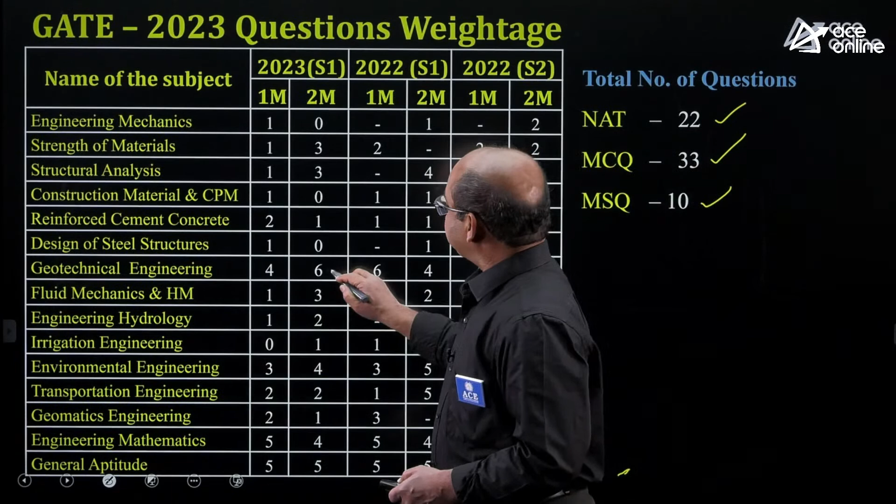Let me discuss the weightage given in the latest GATE 2023 forenoon session civil engineering paper. I am displaying the weightage given for 2023 along with the previous 2022 GATE exam. Like every year, without any surprise, geotechnical engineering enjoys the highest weightage. 6 two-mark questions and 4 one-mark questions come to about 16 marks, the highest weightage given for GT subject. It's not surprising - every year this is more or less the same pattern, 14 to 16 questions coming up.

Next followed by environmental engineering - 4 two-mark questions and 3 one-mark questions, that comes to about 11 marks in total. Then as usual, transportation engineering has 2 two-mark questions and some one-mark questions, around 6 marks total. Mathematics aptitude has no change at all, that is a regular weightage as usual in the GATE papers of civil engineering. The other subjects' weightage you can see here.

This is normally the pattern you see every year in the GATE exam of civil engineering paper, but there is not much deviation. If you have prepared for this GATE examination as per the weightage given for previous years, you can definitely excel this year also, as the pattern of questions and the branch-wise, subject-wise distribution are concerned. Now I will discuss some questions gathered through our students' memory base, the questions of geotechnical engineering. Then my team members will follow one by one.

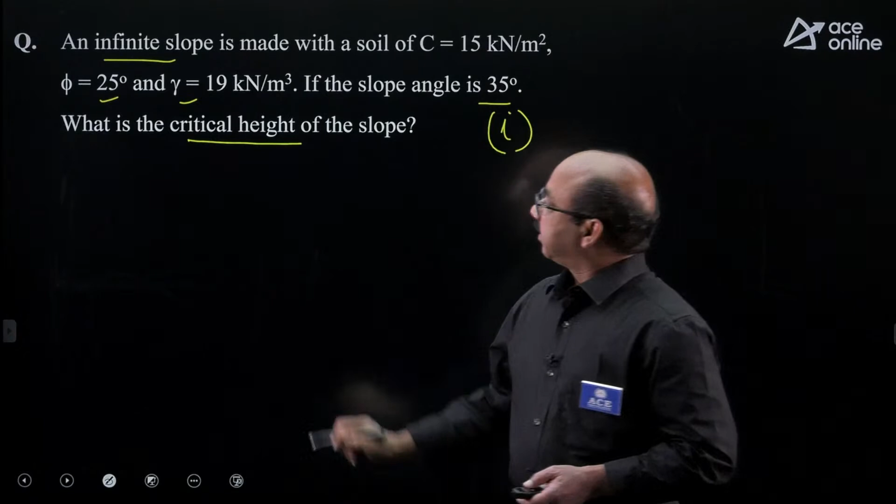What we have gathered: an infinite slope is made with a soil of C value 15 kilopascals, phi is given, gamma also given, and the slope angle also given. What is the critical height of the slope? Please mind it, it is an infinite slope, that is the main point you have to be careful about - it's not a finite slope. Phi is given, gamma is given, and the slope angle we will abbreviate as I. So you are asked to find the critical height of this slope. Critical height of the slope means it is the slope where the factor of safety is going to be 1, unity value.

You may recall the factor of safety equation for infinite slopes. With the usual notations, I read directly the expression: FS = [C + gamma z cos squared I tan phi] upon [gamma z cos I sin I]. For critical height, the factor of safety is taken as 1, and the depth of slope, the z value, we will abbreviate as HC - that is the usual notation we follow. So accordingly, when you write the expression with factor of safety taken as 1: C + gamma into HC cos squared I tan phi, by gamma into HC cos I sin I.

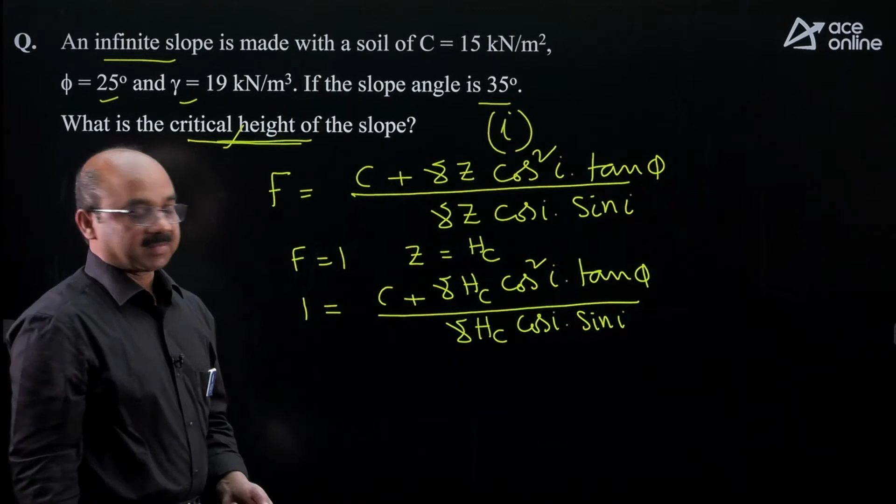In the given problem, the question asks for critical height, you are asked to find HC. So from this expression, you have to take HC common, and if you write the final expression, it is going to be like this.

The final expression is going to be like this: HC is equal to C by gamma, cos squared I, into tan I minus tan phi.

You can see here the C value is given as 15 kilopascals. This is available, gamma also available, I value, this is the I value, and phi angle of internal friction, that is also given as 25 degrees. If you substitute all these values in the expression, finally the answer is going to be like this.

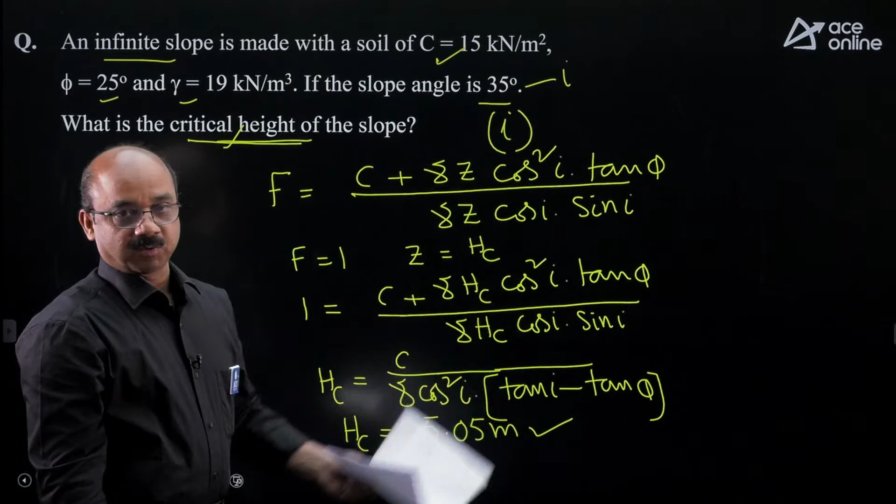The HC value is going to be, when you work out, it comes to be 5.05 meters. So this is the answer for this question. Let us go to the next question.

Yeah, look at this question. This is the MSQ type. You are given some statements with respect to the compaction curve of soils. Based on that, you are given some statements A, B, C, D. You are asked to verify the correct statements here. That question is not properly typed here. The question is you have to verify which are the correct options regarding this compaction curve.

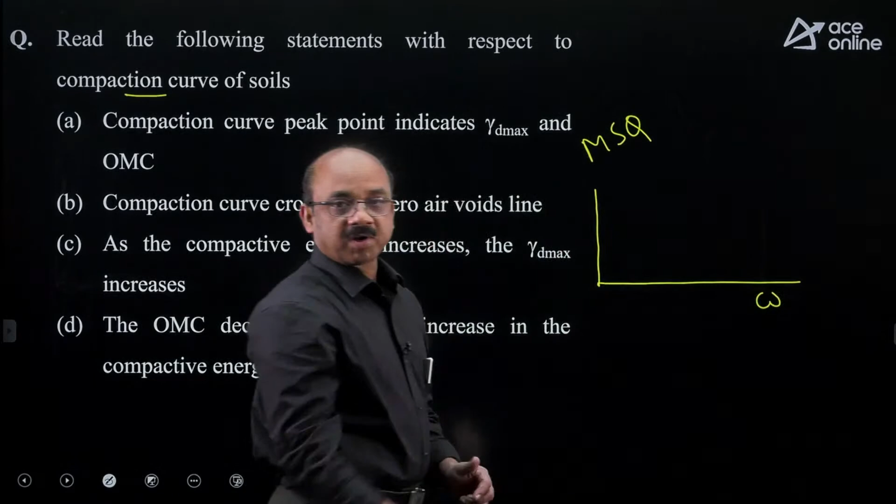So to answer this question, you have to recall the typical compaction curves when you conduct tests on soils, the shape particularly. So this is the compaction curve. Along x-axis, we draw the water content. Along the y-axis, the gamma D value. So this is one compaction curve, and this is another compaction curve. You must be knowing this is for the light compaction, and this is for the heavy compaction energies. And if you draw the zero air voids line, this is the zero air voids line.

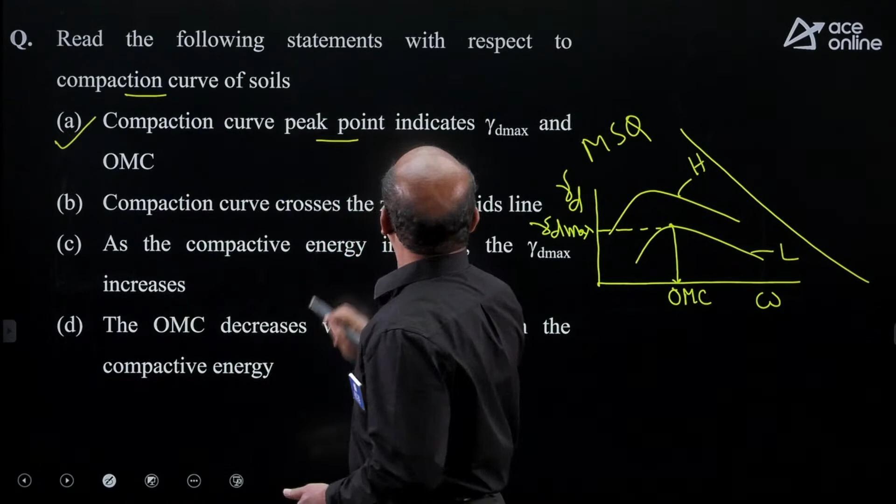Now let us examine the statements one by one. What does the first statement say? Compaction curve peak point indicates gamma D max and OMC. This is absolutely correct statement. Why? Because if you see any one of the compaction curves, this is the peak point. So this x coordinate will give you the OMC value, and the y coordinate will give you the gamma D maximum.

That is how we pick up the OMC and gamma D max from the compaction curve, so this is a correct statement. Next point: compaction curve crosses the zero air voids line. You can see here the compaction curves and the zero air void line. Compaction curve for actual soils will never cross the zero air voids line, because this is only theoretical, these are the actual curves. So therefore, what the statement says, crosses the zero voids, it is not correct. So this is a wrong statement.

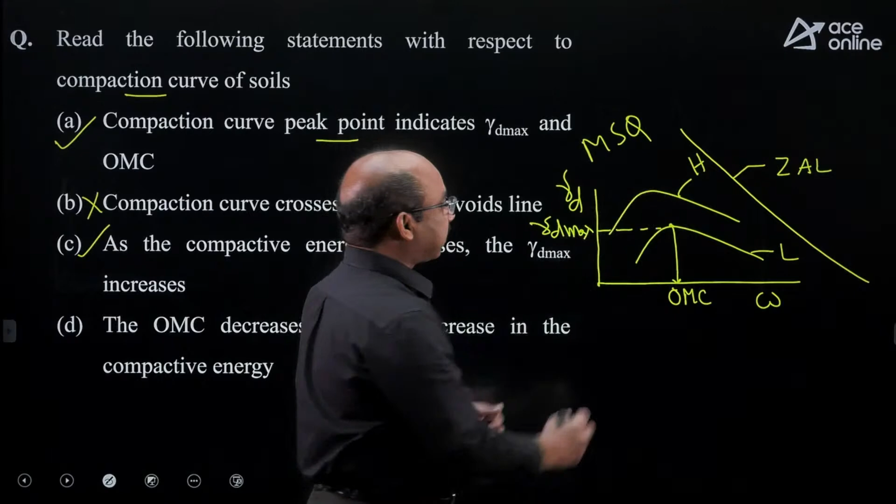Next one: as the compactive energy increases, the gamma D maximum increases. That is true. Compared to light compaction, you can see heavy compaction has got more gamma D value. So this is a correct statement. Next one: the OMC decreases with the increase in the compactive energy. Yes, that is true. You can see here, when energy is light, we have more OMC. When energy is heavy, the OMC value got decreased. So therefore, the OMC decreases with the increase in the energy. This is also a correct statement.

So from the memory-based options what you have got from the students, these are the statements prepared. From these statements shown here, these are the three correct statements. But in actual exam, there may be some variation also, so please verify accordingly.

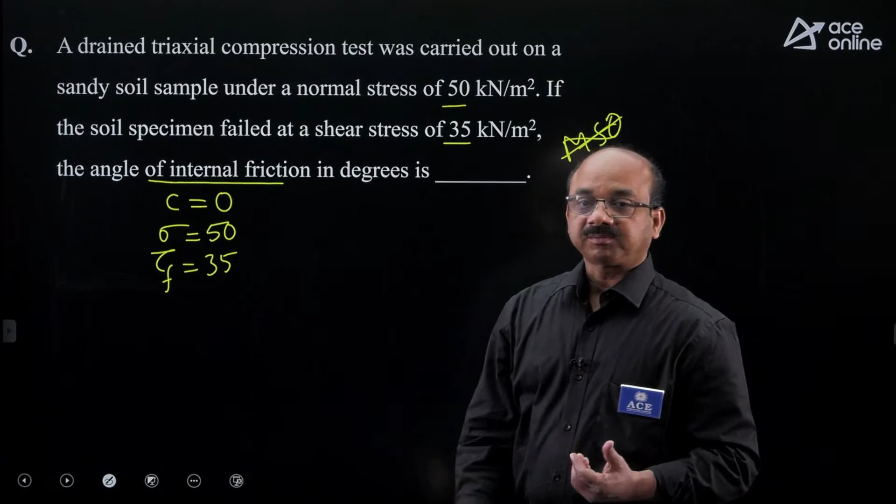Normal stress is given as 50 kilopascals. Sigma is 50 kilopascals. The soil specimen failed at a shear stress of 35, so failed shear stress is given as 35 kilopascals. The question is, what is the angle of internal friction of the soil in terms of degrees? The phi value is asked there. You know this Coulomb's equation: tau f is equal to C plus sigma into tan phi.

Because it's a drained test, I have to use C dash, sigma dash, phi dash, so the given data I have to take accordingly. C is 0 here. When I substitute the data, the failure shear stress tau f is given as 35 kilopascals. So 35 equals C value 0, the sigma value is 50, and tan phi dash. From this, tan phi dash equals 35 by 50.

If you use your calculator, when you work out tan inverse of 35 by 50, it comes to be 35 degrees. So friends, this is the answer, 35 degrees.

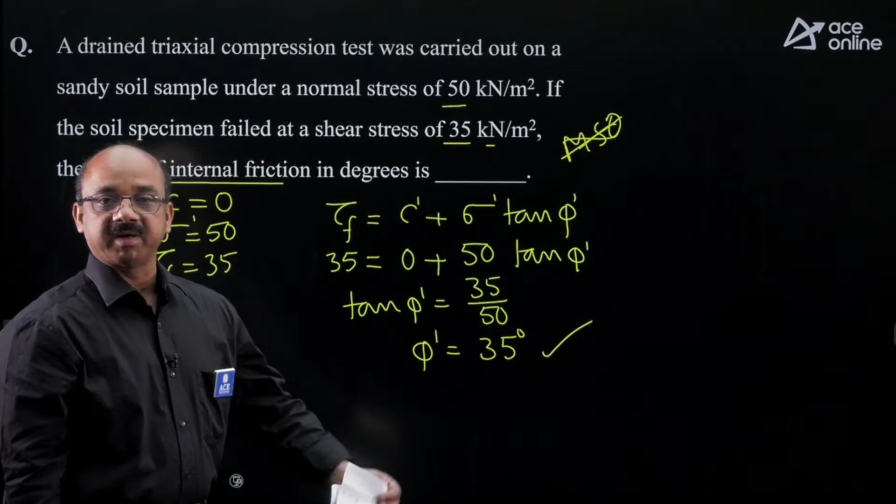Next we will see another question, from lateral earth pressure, that is nothing but retaining walls. Based on data gathered from the students, we have prepared this figure indicating the data given there - a multi-layered, non-homogeneous soil, with surcharge also. The question is, what is the active pressure in kilopascals at the base level of the wall? So obviously, we have to use the Rankine's formula.

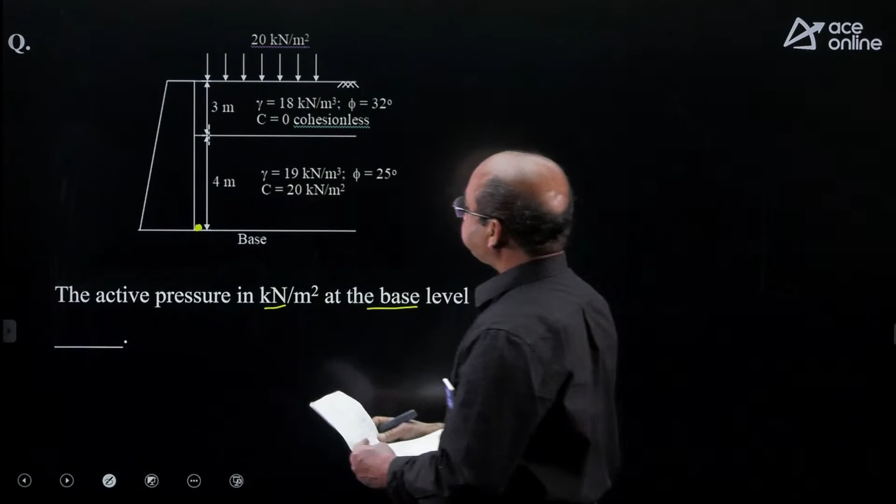If you recall the equation for how to find lateral pressure at any point, we have an equation like this: active pressure at any point equals coefficient of active pressure Ka, into sigma v minus 2c into square root of Ka. This is the general equation I have written there.

So the question is which Ka you are supposed to use there. There are two Ka values, Ka for soil 1 and Ka for soil 2. Because the point is at the bottom of the wall, you are supposed to use the Ka value corresponding to the soil present at the base. Let this K value be Ka2 and this be Ka1. So I write Ka2, sigma v, minus 2C2 root of Ka2. Here C1 is 0, and this is to be taken as C2. So these values you have to take there.

But first of all we require what is called sigma v, the vertical stress at the bottom of the wall. So let me find the vertical stress first. At base, the vertical stress is equal to - don't forget there is a surcharge here.

So Q plus 3 meters depth has a gamma value of 18, I call it gamma 1, and then another 4 meters has the gamma value I call gamma 2, which is 19. When you set the data accordingly, sigma v equals surcharge Q, plus 3 meters into gamma 18, plus 4 meters into gamma 2 value 19. It works out to be 150 kilopascals, that is the vertical stress.

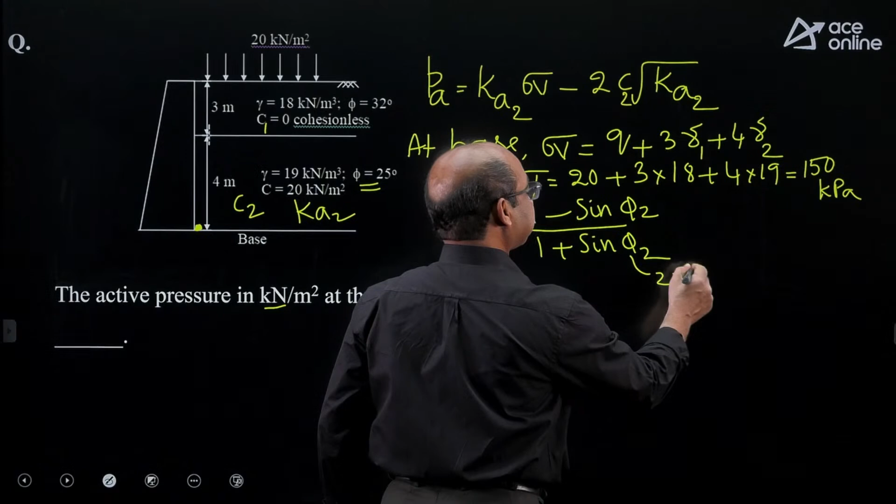Then what about Ka2 at the base of the wall? We have to use Rankine's equation for the coefficient of active pressure: it is equal to 1 minus sine phi2 upon 1 plus sine phi2. Here the phi2 value you are supposed to take is 25 degrees. So when you use the calculator, the Ka2 value works out to be 0.406.

Accordingly, when you substitute back in the equation, the Pa value will work out like this. Therefore Pa equals this equation I am going to use now. Substituting the values: Ka2 that is 0.406, sigma v 150, minus 2C2 - C2 value means soil number 2, the C2 value is 20 kilopascals - so minus 2C2, that is 20, square root of Ka2, 0.406.

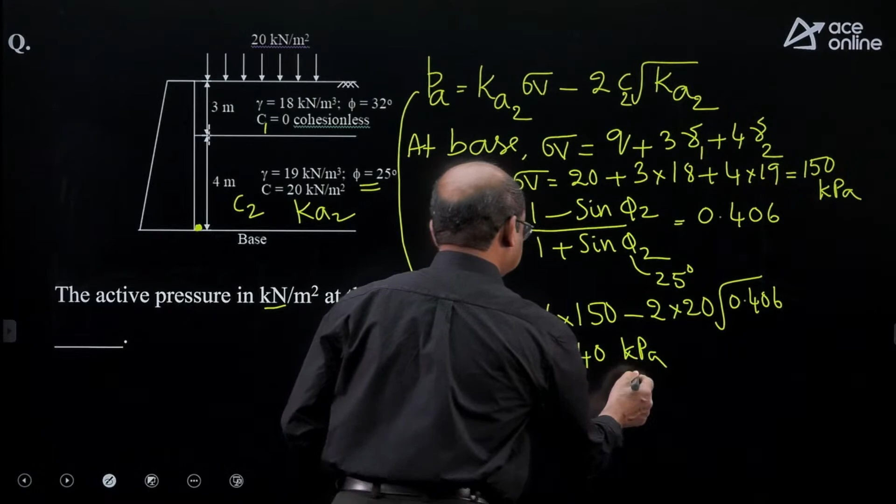So when you apply the calculation, the final value: Ka sigma v minus 2C root Ka comes to be 35.4 kilopascals nearly. So this is the nearest value, this is the answer for this question, 35.4 kilopascals.

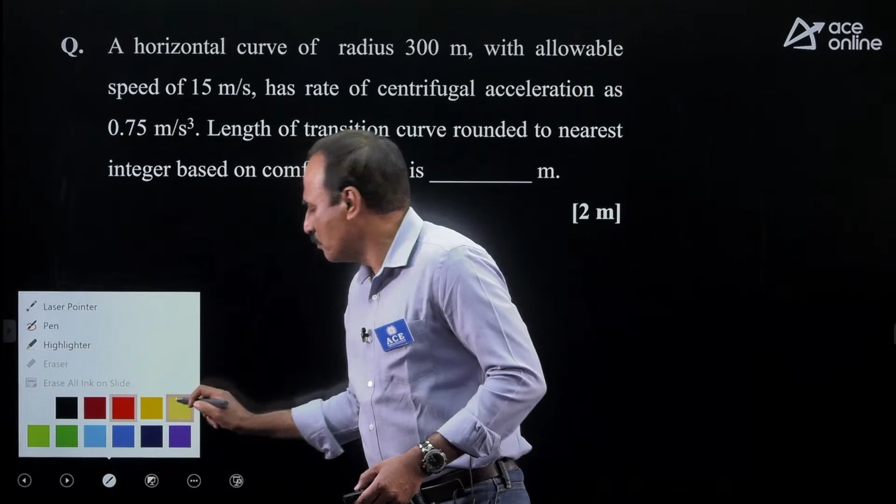You can see the data here is a very simple straightforward substitution type of question. The radius of the curve is given with allowable speed 15 meter per second, directly small v is given. The rate of centrifugal acceleration, capital C, is directly given to us as 0.75. The length of transition curve rounded to nearest integer based upon the comfort criteria or centrifugal criteria.

If you remember the formula, the length of transition based upon the comfort or centrifugal criteria is V cube upon C into R. V cube, so 15 into 15 into 15. Even without a calculator you can do it, but you need to use the online calculator to save time and increase accuracy. So 0.75 and radius is 300. If you simplify, it is directly 15 meter length.

They are asking you the length based upon comfort criteria directly. Simple formula, simple substitution, very simple answer. They are asking you to round it off to nearest integer. The answer itself is an integer, no need to round it off. Directly you can keep the answer as it is.

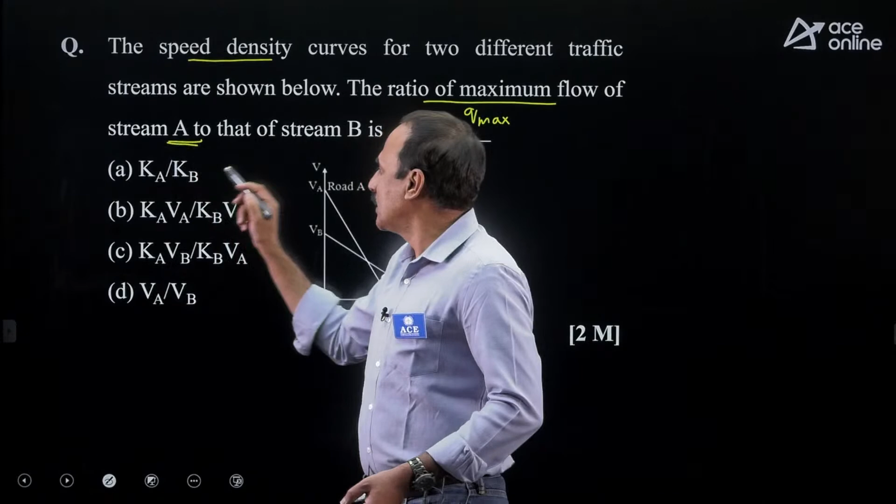Now come to this question. This is based upon traffic engineering, the linear speed density Greenshields model. The speed density curves for two different traffic streams are shown in the figure, speed on y-axis, density on x-axis. The ratio of maximum flow is nothing but capacity. They are asking you the ratio of the capacity of traffic stream A to that of traffic stream B. In a linear speed density model, Qmax is equal to Kmax by 2 into Vmax by 2.

So Qmax is directly proportional to K, directly proportional to V. And they are asking you here the Qmax of stream A to that of stream B. So it is directly related to Kmax of A and Vmax of A, divided by Kmax of stream B, Kb, and Vmax of stream B, Vb. So the answer here is

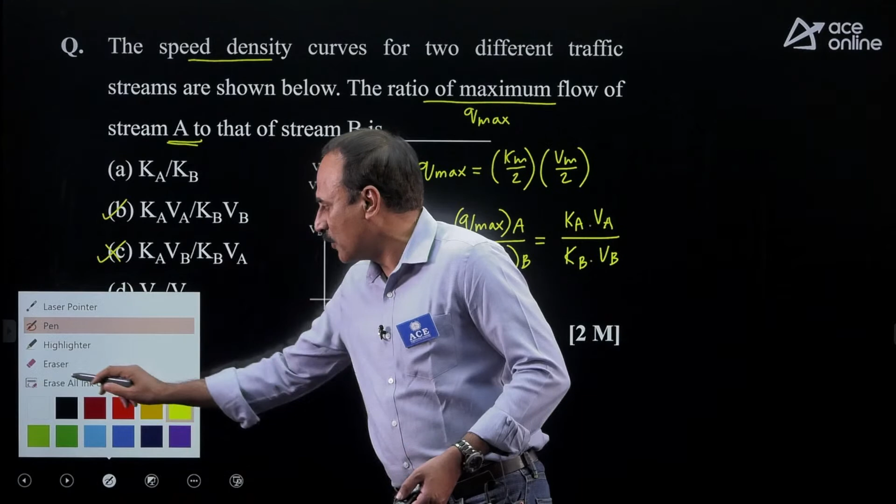Now coming to the other question, it is from the geometric design of vertical curves. You see magnitude of G1 and G2 are given, the gradient G1 less than G2 - this is the condition given to us. The gradient of G1 is less than G2, the magnitude values are given, and G1 and G2 are non-zero values, more than zero. Which of the following statements are true, they are asking.

So we take up the first statement: plus G1 plus G2. G1 is positive, an upward gradient, G2 also upward gradient, makes a summit curve. Let us check: G1 is upward going slope, and G1 is less than G2, G2 is higher. If you join with a curve from G1 to G2, is it a summit curve? No, it is not a summit curve, it is a valley curve - a concave type sag curve. So option 1 is false.

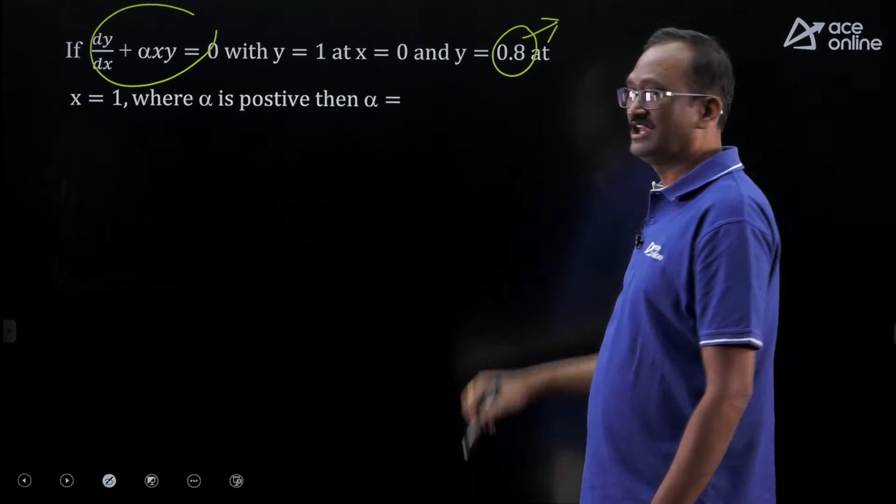Look at the question: dy by dx plus alpha xy equal to 0, with y equal to 1 at x equal to 0, and y equal to 8 at another point, not 0.8. So what is the given differential equation? dy by dx equal to alpha xy will go to that side, then it becomes minus alpha xy. All y terms on one side and x terms on the other side - it is simply a variable separable method. Y will go this side, so it is ln y minus alpha x dx.

If you integrate both sides, integration of 1 by y dy gives ln y equal to minus alpha x square by 2 plus c. What is the first condition? We were given y value 1, x value 0. If I take y equal to 1, ln 1 is 0. If I take x equal to 0, c is 0. Therefore, from equation number 1, c value is 0.

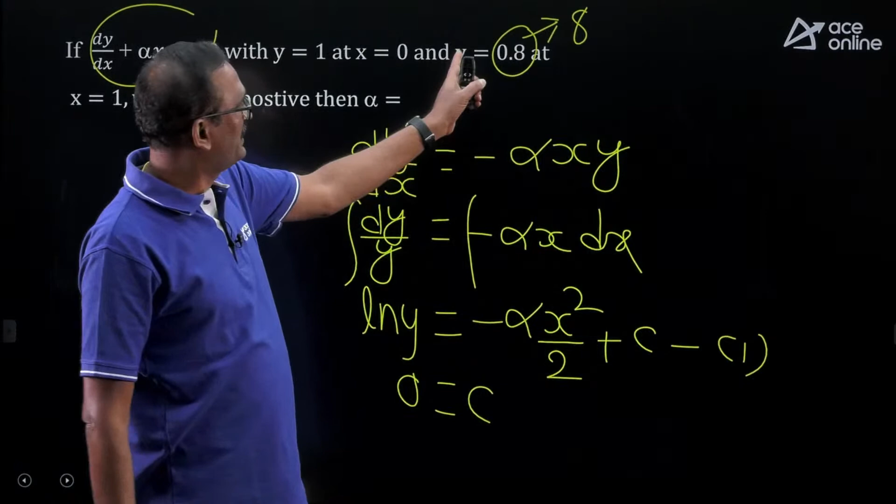So equation number 1 implies ln y equal to minus alpha x square by 2. What is the other condition we were given? y value 8 at x equal to 1. Therefore ln 8 equal to minus alpha by 2, not minus alpha square - this is minus alpha x square by 2, so here it is minus alpha by 2. So from this, what is alpha? Alpha equal to minus 2 ln 8. So I think approximately the answer is minus 4.15 or 4.16, roughly. This is the answer.

Just read out the question: the probability of occurrence of two independent events A and B are 0.5 and 0.8 respectively. Then the probability of occurrence of at least one of the events out of A or B is - regarding independent events, probability of occurrence of at least one...

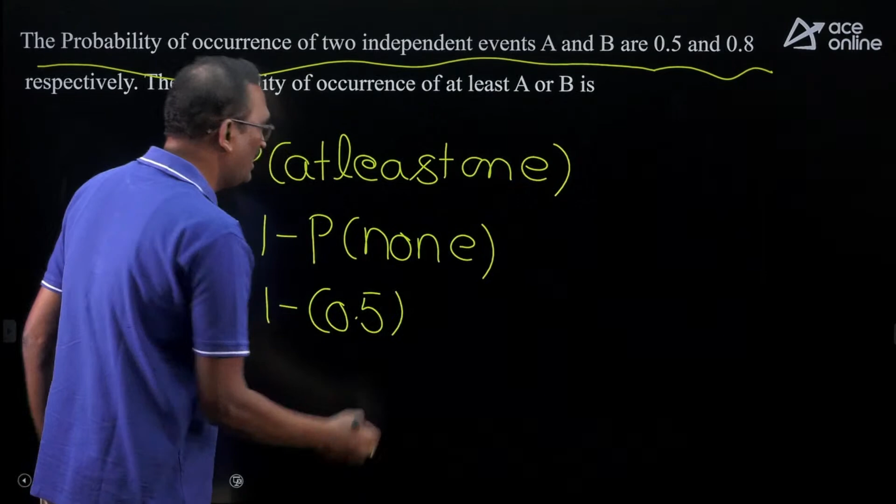...should be 1 minus probability of non-occurrence of both - no one can occur. At least one is 1 minus probability of none, meaning first event doesn't occur and second event doesn't occur. This equals 1 minus probability of first event occurs 0.5, doesn't occur is 0.5, and second event occurs is 0.8, doesn't occur is 0.2. So therefore this is 1 minus 0.1, answer 0.9.

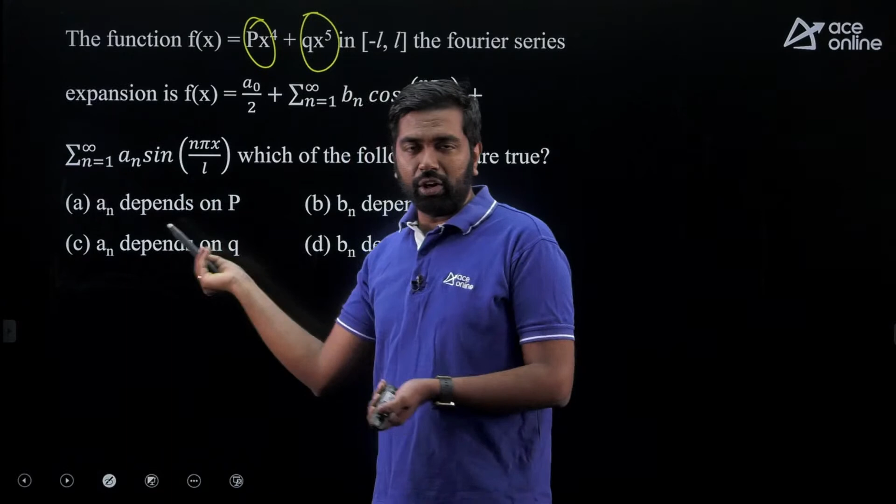We can write integral minus 1 to 1 of 1 by x square dx as 2 times integral 0 to 1 of 1 by x square dx. Don't try to directly integrate because it's an improper integral, so now simplify it using the help of a limit. This can be written as twice the limit as p tends to 0 plus of integral p to 1 of 1 by x square dx. Simplify this and based on that you can easily answer.

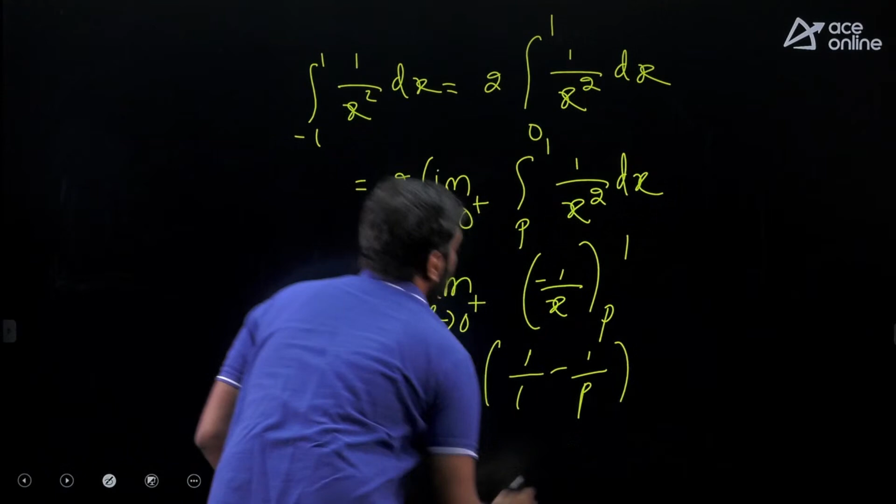So it is 2 times the limit as p tends to 0 plus of the integration of 1 by x square, which is minus 1 by x, with limits p to 1. Substitute the limits and then substitute p tends to 0 plus to conclude the answer. Pull the minus out: it becomes 1 minus 1 by p, and if you substitute p tends to 0 plus, it's like 1 by 0, which is infinity, with a minus here. Overall the answer would be like infinity.

There is also a 2 multiplying it, but 2 into infinity is still infinity. That means the integral does not converge. Do we have such an option? Yes, 'does not converge.' So that's it from the engineering mathematics section.

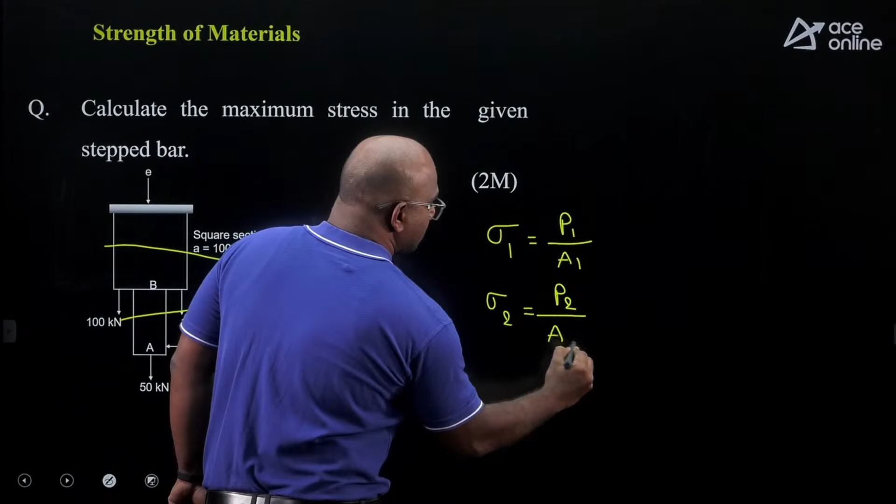For the first bar, look at only one direction to find the force. The force will be 50 divided by area. The cross section is square, 50 into 50, and the force given is 50 kilonewtons. So the answer comes out to 20 megapascals.

For the second force P2, add all the forces: 50 plus 100 plus 100 equals 250 kilonewtons, divided by the area. The area here is 100 by 100, giving 25 megapascals. Since it's asking for maximum stress, the answer is 25 megapascals.

Now coming to the next question, which is a pretty tricky one. He has given the state of stress at a point, but not on two mutually perpendicular planes — instead on two inclined planes. The question asks for the maximum normal stress, which indirectly means finding the principal stress.

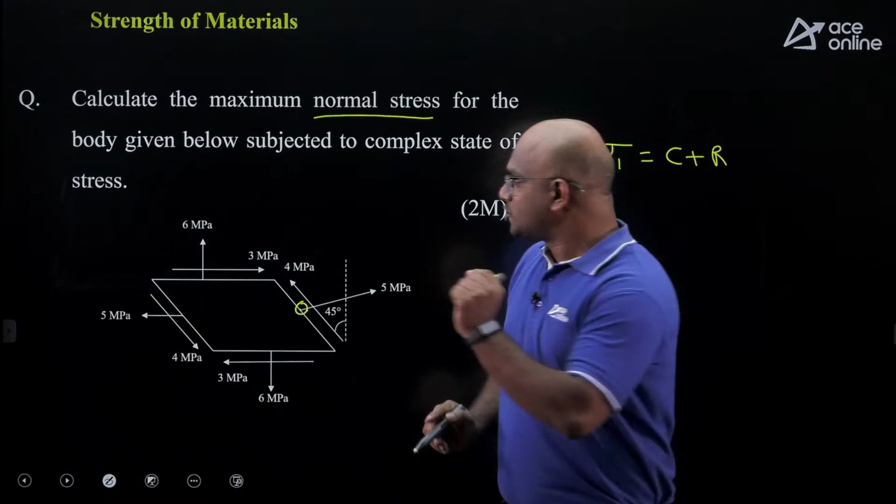The direct formula is sigma 1 equals center plus radius. So my task is to find the center and the radius. No need to solve the full Mohr circle — since every point on the plane gives one point on the Mohr circle, recall the typical circle equation: x minus a whole square plus y minus b whole square equals radius square, for a circle with center (a,b) and radius r, at any point (x,y).

From this I need to find the first point's coordinates: 5 comma 4. The second point's coordinates: 6 comma 3. Knowing two coordinates, I solve two equations: for the first, 5 minus c whole square plus 4 minus 0 whole square equals r square, since b equals 0 in the Mohr circle. For the second, 6 minus c whole square plus 3 minus 0 whole square equals r square. Solving these two gives c equal to 2, and substituting back gives r equal to 5.

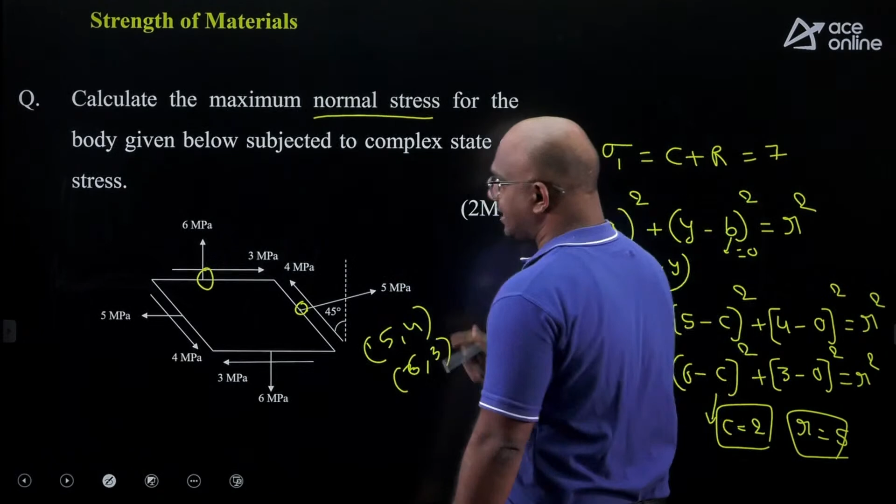Once I know c and r, sigma 1 equals 5 plus 2, which is 7. So the correct answer is 7 megapascals.

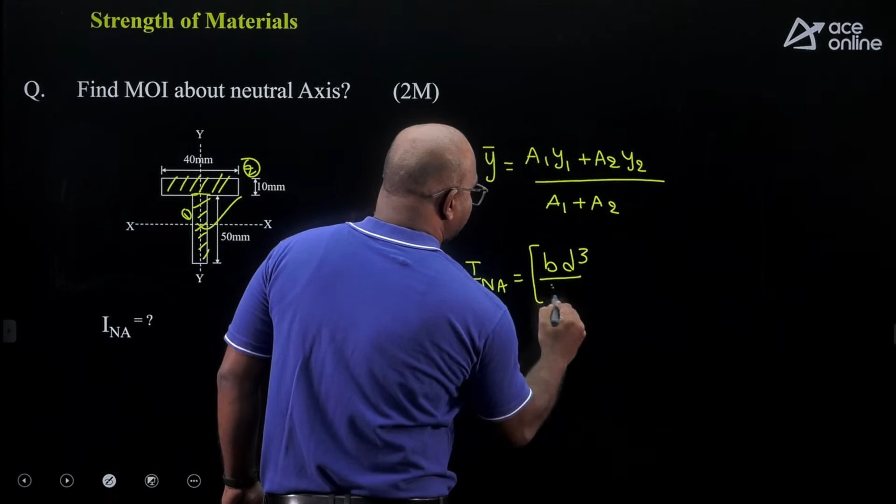Here you have to use the parallel axis theorem, there is no straightforward formula. With two rectangles, I can directly write: I about the neutral axis equals, for the first one, BD cube by 12 plus AD square, and similarly for the second one, BD cube by 12 plus AD square. Just solve it, you will get the correct answer. There is no difficulty in this problem.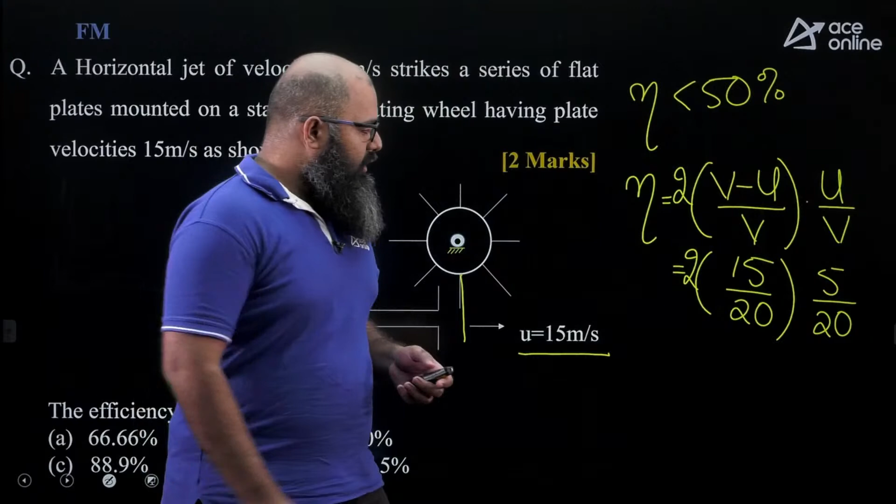But if you wish to solve this question, the efficiency formula is given by (V minus U) whole divided by V, multiplied by U by V. V here is 20 and U here is 15. So this becomes 15 by 20 multiplied by 5 by 20. 15 by 20, two times this is... so if you calculate, this comes out to be 150 divided by 400, which equals 37.5%. So this was the only question to have appeared from Fluid Mechanics 1.

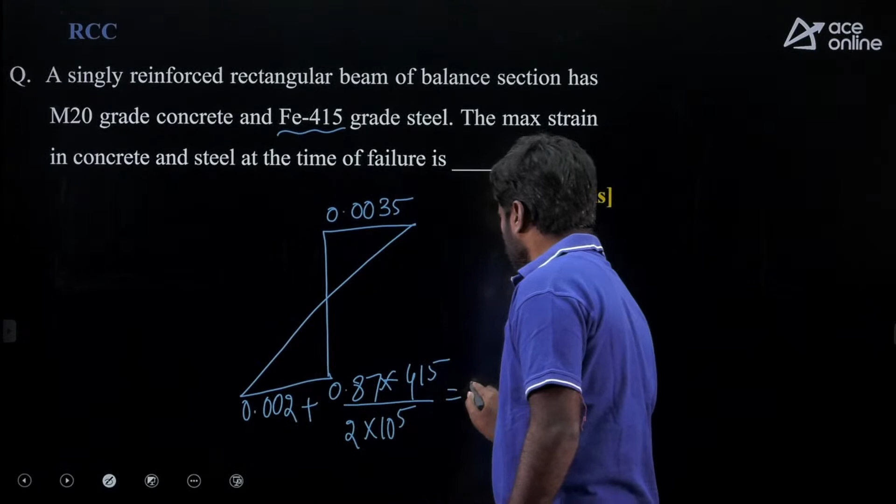Very simple question. They are asking what is the maximum strain in concrete at the extreme compression fiber for a balanced section, and what is the strain in tension reinforcement. At the time of failure, maximum strain in concrete is 0.0035, whereas the strain in tension reinforcement is 0.002 plus 0.87 Fy upon Es. Here Fe415 grade steel is given, so Fy value is 415, and Es for steel is 2 into 10 to the power of 5. If you simplify this value, you get 0.0038. So the answer is 0.0035 and 0.0038.

Next question: creep of concrete under compression is defined as - this is a direct definition for creep. My dear, under constant stress, the strain continuously increases. Options given are like: under constant stress, strain increases; under constant strain, stress increases. So the correct one is: under constant stress, strain increases over a period of time, right?

Next question: when the water cement ratio increases in concrete, the effect is - options given are workability increases, compressive strength increases, or both decrease. My dear, whenever water cement ratio increases in concrete, strength of concrete decreases, but workability increases. These are the 3 questions asked from RCC, okay?

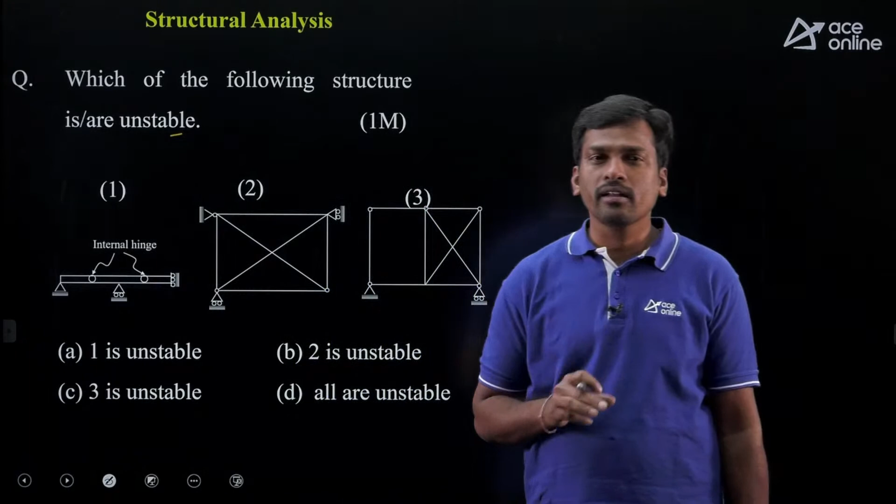First question: which of the following structures is unstable? I give 2 conditions to check stability. First, if all support reactions are concurrent, rigid body rotation takes place, it is called unstable. If all support reactions are parallel, rigid body translation will take place. Here in the second diagram, this is a roller support with one reaction, a hinged support with 2 reactions, and another roller support with one horizontal reaction. The line of action of this vertical reaction, these 2 reactions, and this horizontal reaction all meet at one point, so this is concurrent. If all support reactions are concurrent, it is unstable. So the second one is unstable.

Yes, correct. Now this is the truss. The perfect shape of a truss is a triangle. In this panel, a triangle shape is missing, so this is an internally unstable structure. So this is also unstable.

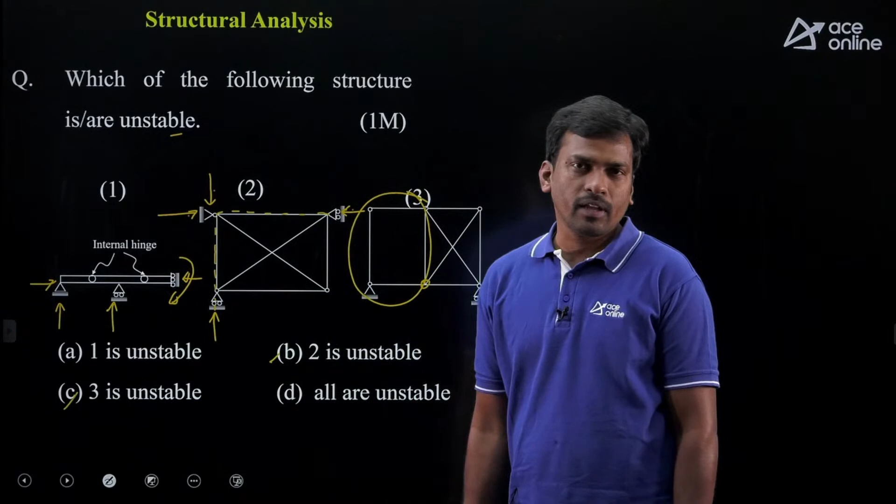Now we'll see the next question. For the truss shown in the figure, find the force in member U2 L3.

This is U2 L3. Simply we can use the method of section. Now this is symmetric, so due to symmetry we just find the vertical reactions. The total loads here are 5 into 20, this is 50 kilonewton and this is also 50 kilonewton. So we have to find the force in this member. Now I'll use the method of section: just cut the structure vertically, then do analysis for either the left part or right part of the structure, you'll get the same answer. For example, I want to do analysis for the left part of the structure.

Now this is the angle theta. What is the theta value here? Total how many spans are given? Total 6 are given, so each span is 3 meters, then this is also 3 meters, so theta is nothing but 45 degrees. Now we have to find the force in the inclined member.

Simply use sigma V equals 0. We are doing analysis for the left part, so consider only left part forces, don't consider right part forces. In the left part forces, downward forces equal upward forces. Now assume tensile forces initially, since for cut members we'll assume tensile forces. Now this is a vertical component downward.

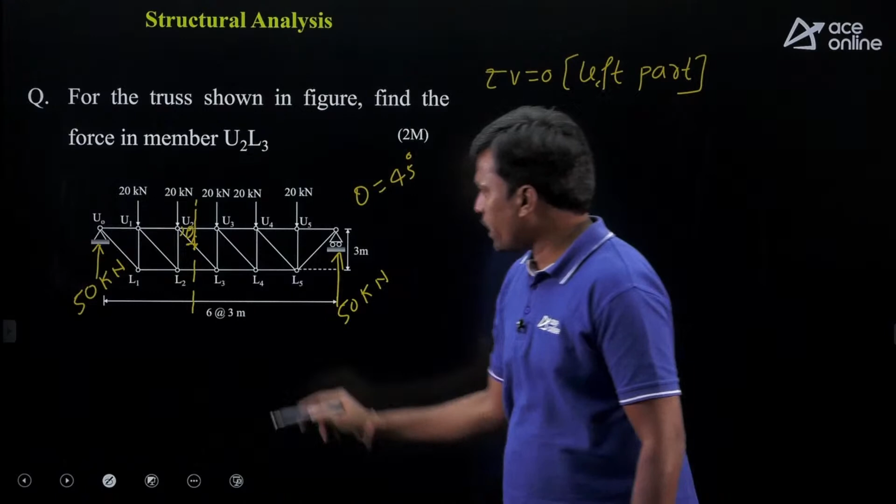Now this is the force in member U2 L3, and this is sine 45 degrees. This is downward, and these 2 loads are also downward, 20 plus 20. And what is the upward force here? Equals to 50. From this you will get the force in member U2 L3, which is 10 root 2. So we got a positive value, so the assumed direction is correct. So this is tension.

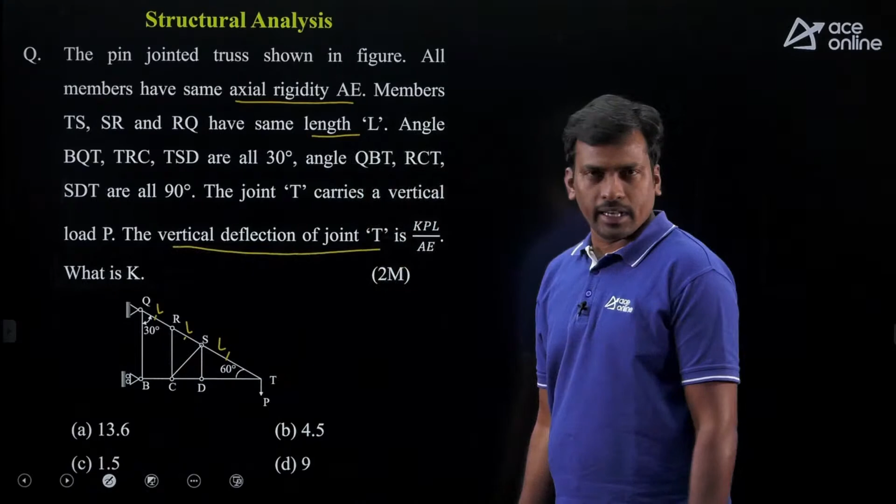Next question: here a truss is given. All members have the same axial rigidity AE. Members TS, RS and RQ have the same length, given as L, L, L. The angle given is 60 degrees and here the angle is 30 degrees. The vertical deflection of joint T is given as K times PL by AE, and we need to find the value of K. Students, the formula to find the vertical deflection of joint T equals the summation of PKL by AE, this is the unit load method.

So here we have to find the value of K. What is P? The force in all the members due to real loads. And what is K? The force in all the members due to the virtual unit load applied where we want to find the deflection. So first we'll find the P values.

So find the P values. To find the P and K values, first we have to identify the zero force members. At joint D, number of members are 3, two are in the same line, so force in the third member is 0. Just remove the zero force member, but practically we never remove it, though theoretically we can.

After removing that zero force member, at joint C, number of members are 3, two are in same line, so force in the third member is 0. Remove this zero member too. After removing it, number of members is again 3, out of which two are in same line, so force in the third member is 0.

Here there is only one horizontal reaction. Now treat this reaction as a member. These two are in same line, so force in the third member is 0. Students, only these 3 members are subjected to forces at the top, and at the bottom these 3 members are subjected to forces. The force in these 3 members is the same, and force in these other 3 members is the same. So there's no need to find the force in all the members—finding force in just 2 members is sufficient to get the answer.

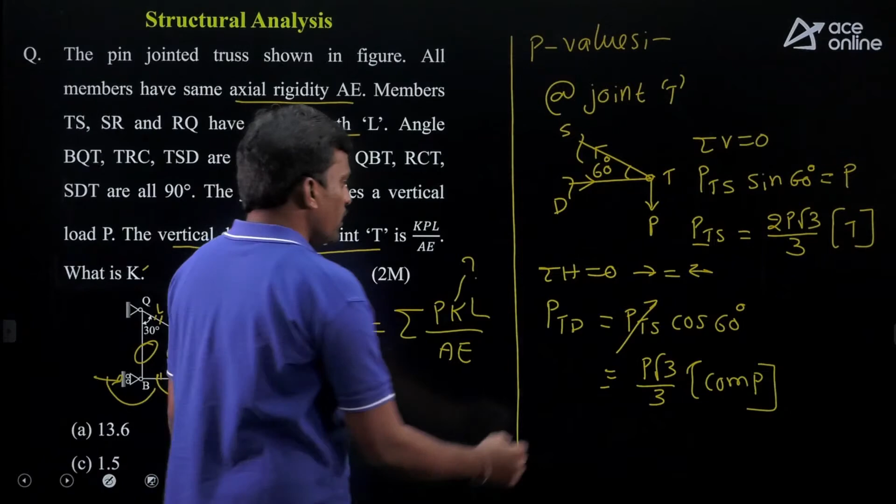Next we have to find the K values. To find the K values, we remove the load P, and at joint T we apply a virtual unit load—meaning in place of P we substitute 1. So in place of P we substitute 1, and this becomes the K value. Substitute P equals 1 here too, then this is the K value. Then substitute into this formula. Number of members given total 3.

So 3 into, this is 2P root 3 by 3, which is tension, so positive only. And what is the K value? Just substitute P equals 1. Then L is given by AE plus—what is the P value here? Root 3 by 3, but this is given as compression, so minus. And the K value: substitute P equals 1, then root 3 by 3 is the K value.

What is the L value here? This is given as L, and at 60 degrees, this becomes L by 2, so L by 2 by AE. Now if you solve this, you will get the vertical deflection at T as 4.5 PL by AE. This is the K value.

What is the K value here? So K equals 4.5. Now we'll see the next question.

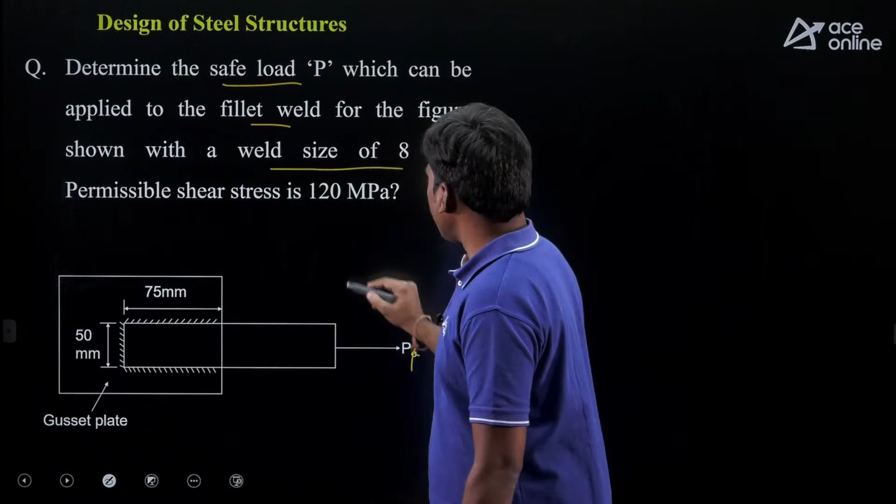Here given, determine the safe load P. This is the safe load P given, and the fillet weld is shown, the weld size given is S equals to 8 mm, and permissible shear stress, as per working stress method, is 120.

So load equals to permissible shear stress into area. Here shear stress is 120, and the area is effective area equals to effective length into effective throat thickness. Effective length is 75 plus 75 plus 50, which equals 200, then throat thickness is K into S.

So size of weld is given as 8 mm, and these are 90 degrees, so the angle between fusion faces is 90, so K is 0.7. You'll get 134.4 kilonewton. This is the only question from steel structure. That's it.

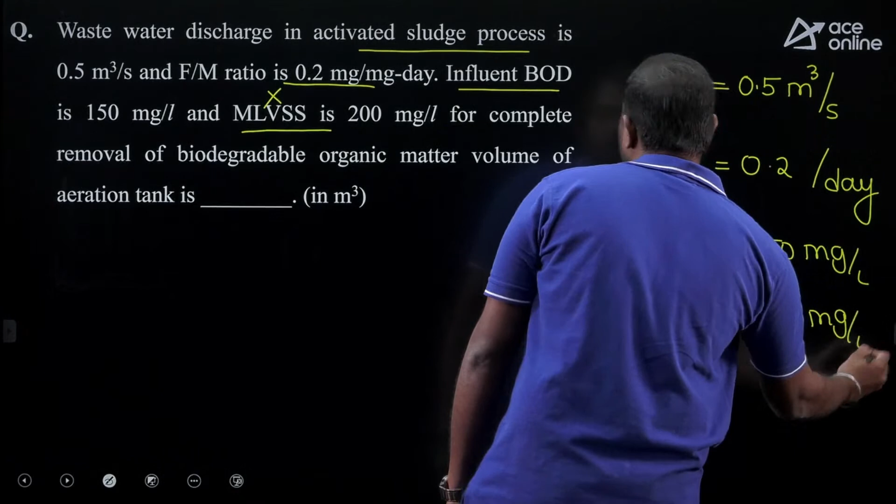What they are asking is for complete removal of the biodegradable organic matter, 100% removal, what is the volume of the aeration tank? So when they ask about the volume, first we need to understand the meaning of food to microbes ratio - that's how much BOD, the mass of food we apply in the aeration tank, relates to the mass of microbes present in the aeration tank.

So F by M equals mass of food applied, which is Q into Yi, divided by mass of suspended solids in the aeration tank, V into X. From this we can directly find the V value.

So V equals... what is Q? But this is given in terms of second, so you have to convert that to per day, because units should be meter cube per day. This is mg per liter, X is mg per liter, so mg per liter gets cancelled, and V is in terms of meter cube, so meter cube cancels, and the answer should be in terms of per day. F by M is given as per day only.

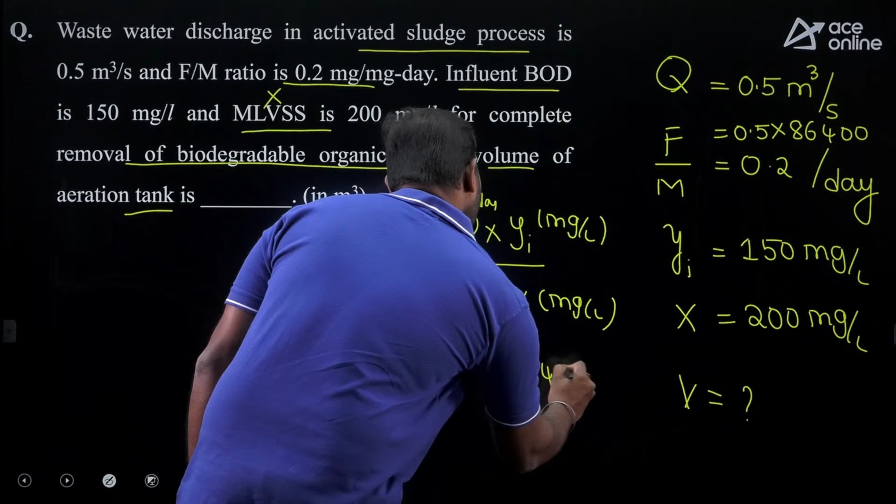So now send V to the other side, but you have to write Q in terms of meter cube per day, so simply multiply. This is per second, right, for a given day there are 86,400 seconds, so we substitute: 0.5 into 86,400 into influent BOD 150, divided by F by M ratio 0.2 into 200.

If you solve it, the volume comes out to be 162000 meter cube. It's a straightforward question, so there is not much thinking involved.

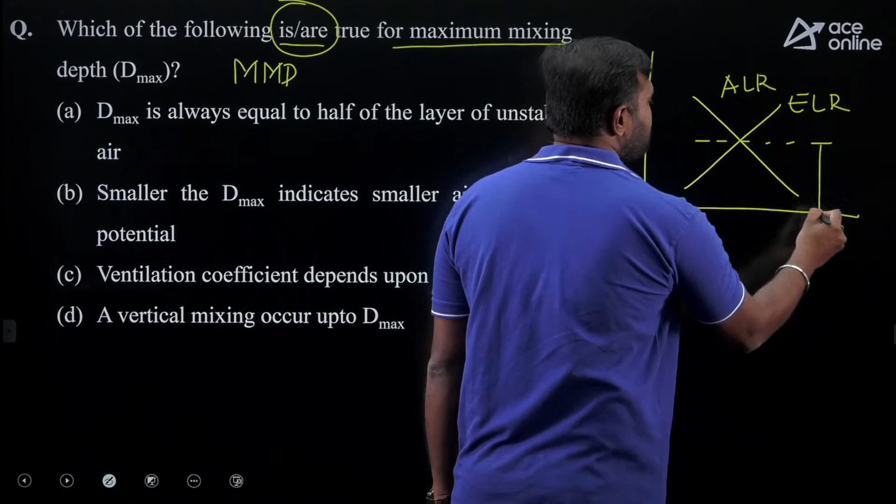Whereas the environmental lapse rate depends upon the time, the season, the place. So if you draw the environmental lapse rate, suppose let's take the inversion case. This is an inversion case, environmental lapse rate, and the point where they intercept, this vertical height we call the maximum mixing depth. Up to that point, up to this height, there is huge dispersion, dilution and mixing of the pollutants happening.

So now let's see the content. Dmax is always equal to half of the layer of the unstable air - no, it's not half. Smaller the Dmax indicates smaller the air pollution potential, which means if the height is going to be less, in that case the air pollution is going to be less. More the height means more mixing, less pollution.

So now this is the correct answer, and the ventilation coefficient also depends upon Dmax, as it represents vertical mixing - vertical mixing occurs up to the D maximum. From the given questions, B, C, D are correct answers if they have asked about the correct statement. If they had asked about the incorrect statement, you would choose option A.

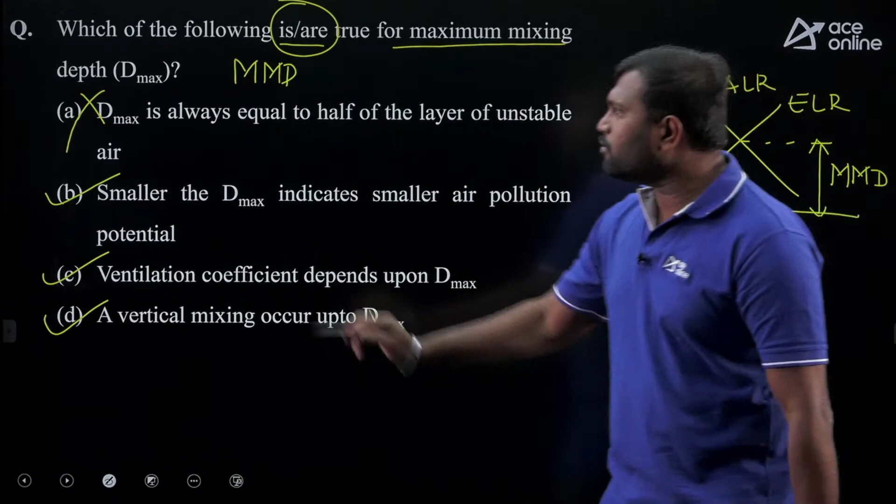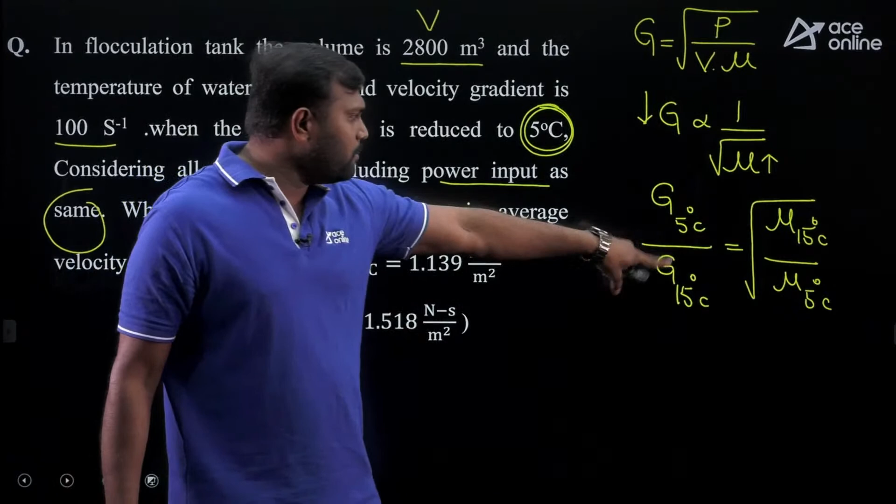From 15 to 5 degrees, temperature decrease means viscosity will increase. When viscosity increases, the gradient will decrease, which means the change we're going to see is a decrease. Now directly from here, let's take the 15 degrees as 1. So G at 5 degrees to G at 15 degrees equals viscosity mu at 15 degrees by mu at 5 degrees centigrade. Since I'm asking about the change, we know it's going to be more in the case of 5 degrees.

So viscosity is going to be more in the case of 5 degrees centigrade. If you solve it, or else we can take G15 by G5. So G15 by 5 degrees equals mu 5 degrees by mu 15 degrees. So 1 minus, if you do 1 minus multiplied by the percentage, that directly gives the percentage change. Simply do 1 minus on both sides.

So 1 minus square root of, what is the viscosity at 5 degrees given? 1.518. So 5 degrees is given as 1.5 unit, okay fine, you can take this one as 5 degrees, this is 15 and 5. They're asking about the change. So if we make it like this... okay yes, initially it's correct, G15 only, I'm sorry. So this is 15 and this is 5 only.

So 1 minus square root of 1.139 by 1.518, multiplied by 100. If you solve it, the answer will be somewhere around 13.4%. You can take that as a proportional relation. So that's a 2 marks question.

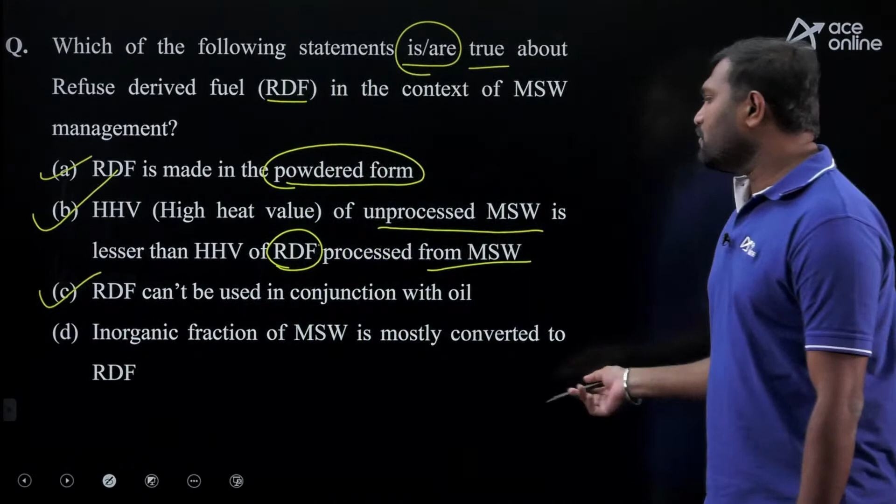RDF cannot be used in conjunction with oil - yes, that's true. And inorganic fraction of the MSW is mostly converted into RDF - no, organic fraction is converted into RDF. So the only incorrect statement is D. The correct answers are A, B and C.

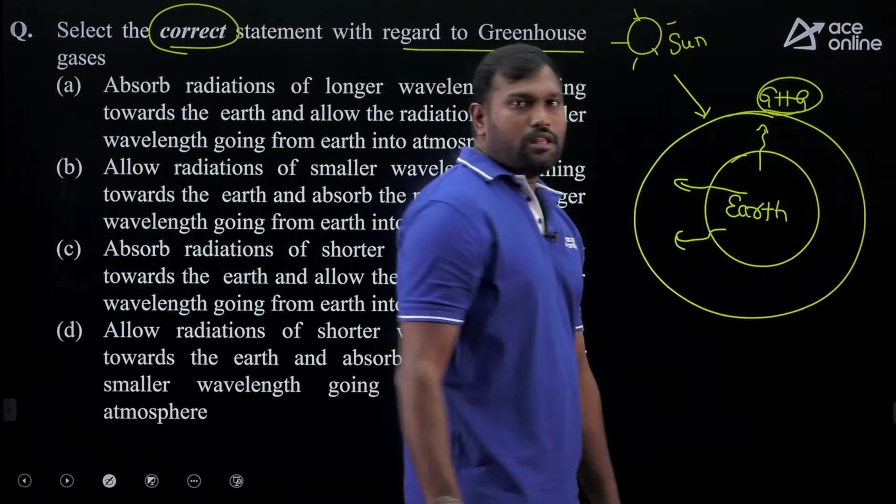They will allow all the radiations into the earth. But once it enters the earth, the earth liberates some more radiation, some more reflection. Out of those, whatever longer wavelength radiations are there, those will be absorbed by the greenhouse gases, leaving the smaller wave radiations. So if you see option B, it says GHG allows the radiations of the smaller wavelength coming towards the earth.

So it allows the smaller radiations to go towards the earth, and from the earth whatever is liberated, the larger wavelength radiations are absorbed by the greenhouse gases. So from the given options, the answer is option B. That's about the geotechnical and environmental engineering portion.

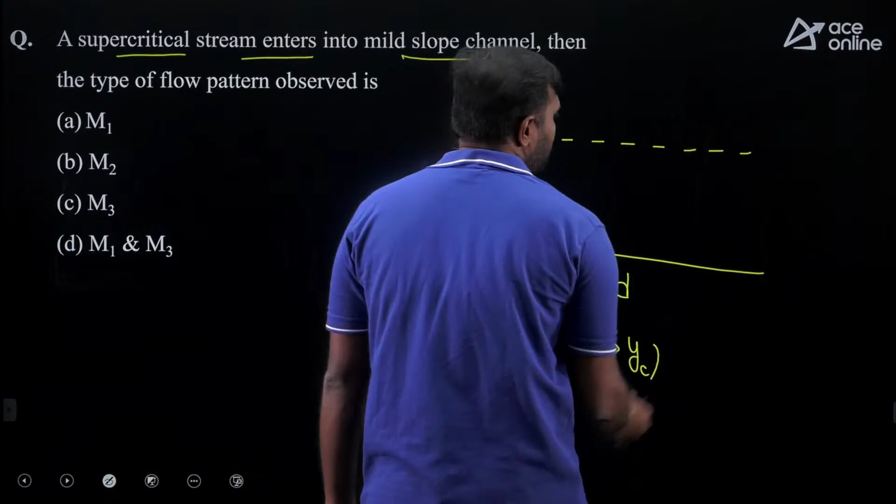Now let's see the question from open channel flow. A supercritical flow stream enters into a mild slope channel, and we need the type of flow pattern observed. The given is a mild slope, and you know mild slope means normal depth is greater than critical depth. So this is the NDL, and here it is the CDL.

It clearly mentions that the given flow is supercritical. Supercritical flow means the depth is less than the critical depth, so the flow will be somewhere over here. Eventually at the end, the flow has to meet uniform flow. Flow always starts with NDL and should end with NDL, so it has to meet the NDL.

So what happens is, as it is the third profile, water level will rise first, perpendicular to CDL, then there is a hydraulic jump, and then it meets the NDL. So in this zone, the profile we see is the M3 profile. In simple words, the third profile is always a supercritical flow, and since the given is supercritical flow, the answer should be the third profile. So the correct answer is M3.

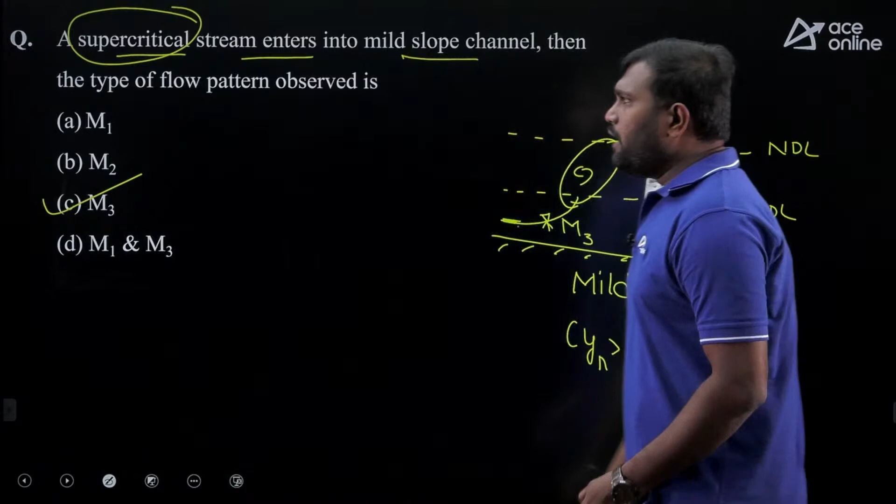Now let's come to the hydraulic jump. This question is based upon the hydraulic jump and is a frequently asked type of concept. Hydraulic jump occurs in a horizontal, frictionless, 1 meter wide rectangular channel, so width is 1 meter, with a pre-jump depth of 0.2 meter and post-jump depth of 1 meter respectively. If the value of G is given, what is the specific force they are asking?

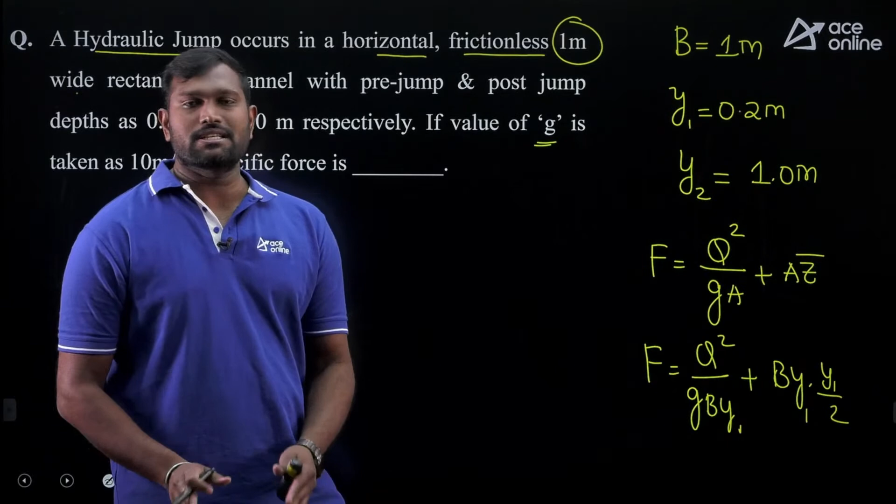The specific force F equals Q square by GA plus A into Z bar. Okay, so we have the depths, but we don't know the discharge. If you rewrite this, Q square by G B y1, plus B y1 into y1 by 2. The specific force pre-jump and post-jump, before and after formation of the jump, at both sections, the specific force is the same.

You can use any of the depths to find the specific force. But the point is, we have the depth, we have the width, but what is the discharge? We need to find it out. So what is the relation between the conjugate depths? The relation is Q square by G equals y1 y2 into y1 plus y2 by 2. Now as you know, width equals 1, so small q is nothing but capital Q.

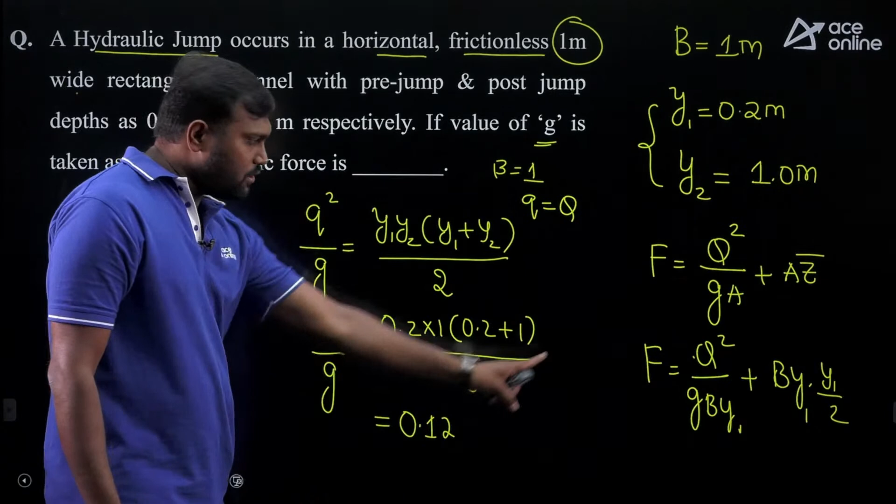Directly I can find Q square by G equals y1 y2, 0.2 into 1 into 0.2 plus 1 by 2, which equals 0.12. I don't need to substitute again. So you substitute the Q square by G value there, and b value is 1. So Q square by G is 0.12 by b value as 1. I can use y1 or y2, let's go with y1: 0.2 plus b is also 1 here, 0.2 square by 2. If you solve it, you get 0.62.

So these are the questions from environmental engineering and open channel flow.

Dear friends, let us see today's morning session on hydrology and irrigation. The ordinates of a 1 hour unit hydrograph on a catchment are given below. Using the principle of superposition, find the d hour unit hydrograph.

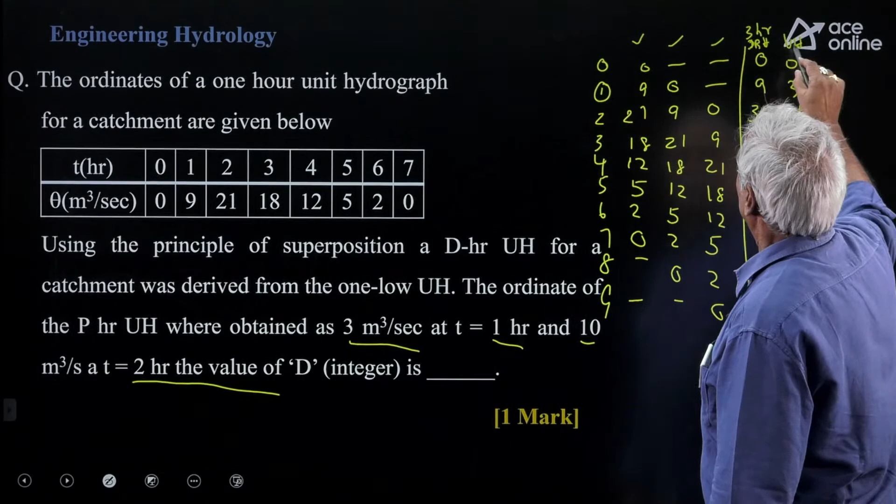For 3 hour, because it is the DRH, I want to get for UH by 3: 0, 3, 10, so on and so forth. At the end of the 1 hour, that unit hydrograph of D hours is getting 3 units. It is given as 3 units.

Applying the principle of superposition. Using the S-curve technique also we can do it, but there is a chance of confusion. This is the simpler method. You have to lag by 2 times, go on lagging, and observe the given values.

3 and 10. When you are getting multiples of 3 and 10 in 2 consecutive steps, you have to observe. The second step and third step, you are able to get 3 into 3, 10 into 3. That's why 3 is the answer for the problem.

If you have a good mathematical background, by observing the data, you can observe 21 plus 9 equals 30, and it is given as 10. 30 by 10, answer is 3.

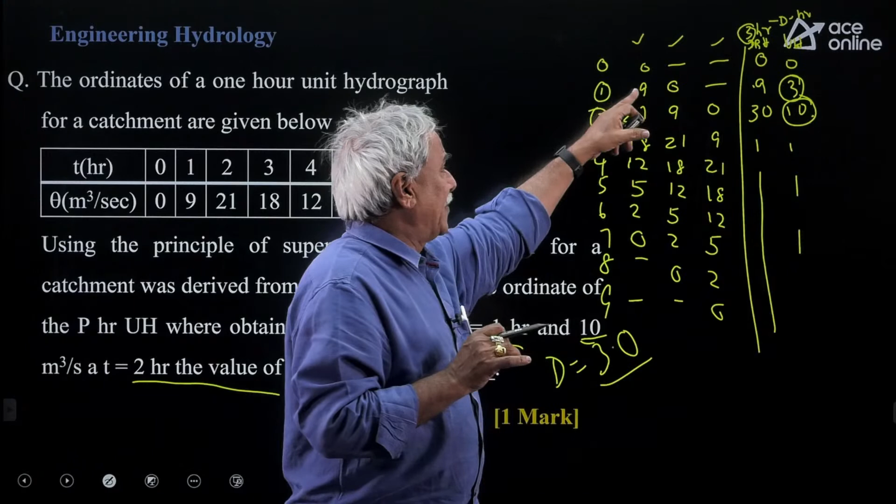If you want to get it in a fraction of a second, check the first value and second value. How many times do you have to get this value when you get 9 here? Third reading 0. Given value, first lag, second lag. Total 3, therefore D equals 3. By any one of these 3 methods, you can solve the problem within 2 seconds, provided you have good mathematical observation.

Let us go to the second question, friends. It's a simple question given. A 12-hour storm occurs over a catchment, resulting in a direct runoff depth of 100 millimeter. Time distribution of rainfall intensity is given. Phi index, because nothing is given about the initial losses and other parameters.

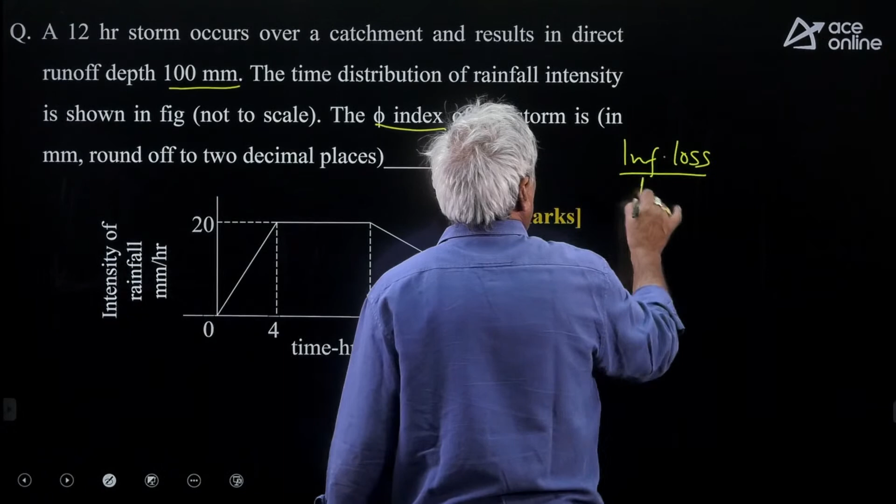We say phi index and W index are same. How do you calculate the phi index? Infiltration loss divided by time, that's all. How do you get infiltration loss? If you calculate the area of the hydrograph, it will give rainfall depth. How do you get the area?

Half into 4 hours into 20, plus 2 into 20, plus half into 6 into 20. Area of the total gives rainfall depth, my dear friends. This is 40. This is 40. This is 60, total 140 millimeters rainfall depth. Runoff depth is given as 100 millimeter.

Rainfall depth given 140 millimeter. So infiltration loss will be 140 minus 100 divided by time duration of rainfall, 12 hours. 40 by 12 is 10 by 3. Straight away the answer for the problem is 3.3 millimeter per hour.

What's the principle involved? Rainfall depth: how do you get the rainfall depth? Area of the hydrograph will give rainfall depth. Runoff depth is given directly. Rainfall minus runoff will give infiltration loss. Infiltration loss divided by time duration of rainfall will give the infiltration index.

Whether he has given phi index or W index, it is again a 2 marks question in hydrology, my dear friends. Answer for the question is 3.33 millimeter per hour.

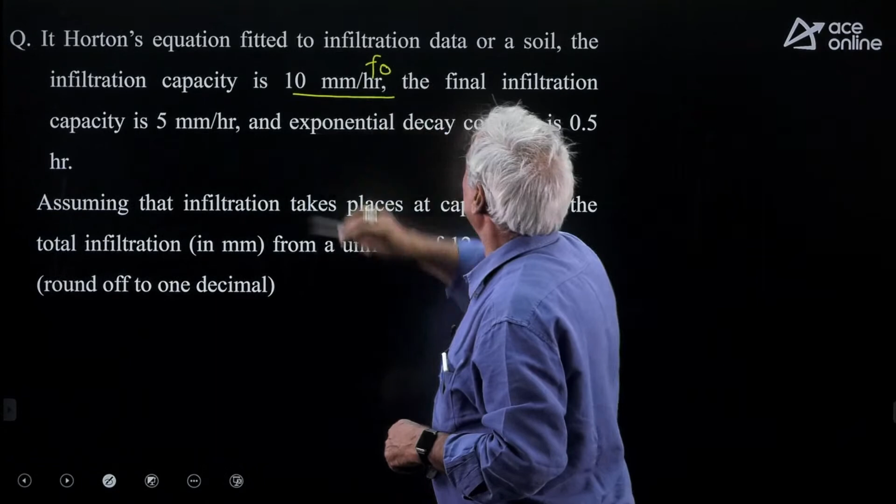The next question again is on infiltration. In Horton's equation, fitted to infiltration data of a soil. Initial infiltration is 10 millimeter per hour. Final infiltration is 5 millimeter per hour. Exponential decay constant K will be 0.5. Assuming that infiltration takes place at a capacity rate, find total infiltration for the uniform duration of 12 hours.

Don't go by the integration technique, it takes a long time. How do you get the depth of infiltration? Depth of infiltration equals FC into T, plus F0 minus FC divided by K, that's all. Single step solution. FC is 5 into 12, plus F0 minus FC, 10 minus 5, divided by K. K value is given as 0.5.

5 into 12 gives 60. 5 by 0.5 is 10. 60 plus 10 is the answer for the given problem: what is the total depth of infiltration in the 12 hours of rainfall? 70 millimeters is the right answer.

I repeat, don't apply the integration technique, it takes minimum 3 minutes. If you do it by this method, you can do it within 10-15 seconds.

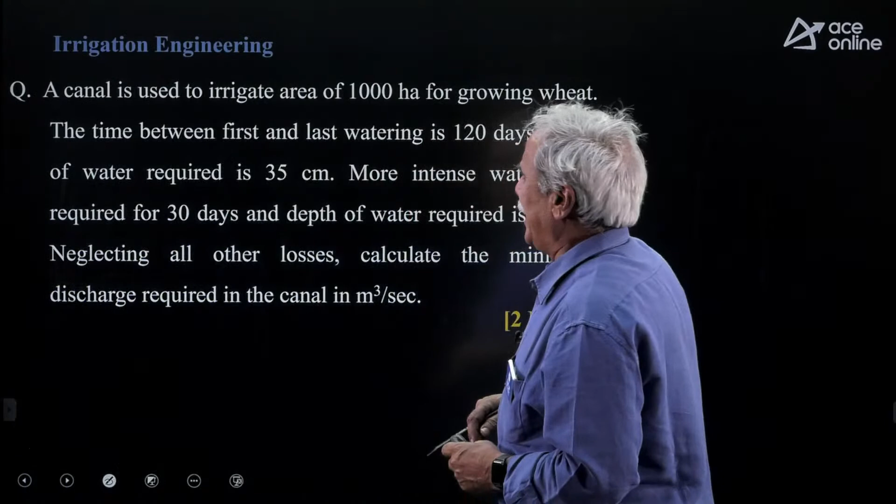Let us come to the only question given in irrigation engineering. Area given is 1000 hectares. First and last watering is 120 days, depth of water required is 35 centimeters. More intense watering is required for 30 days, depth of water required is 12 centimeters. Out of 120 days, the more intense crop is for 30 days, the second crop is for 90 days, and the first crop is for 30 days.

For the 30 days crop, how much water is required? 12 centimeters. For this, water required is 35 centimeters. I know the base period, I know delta. Calculate first the duty, because it is given in centimeters: 864B divided by delta.

864 into 90 divided by 35. 864 multiplied with 30 divided by 12.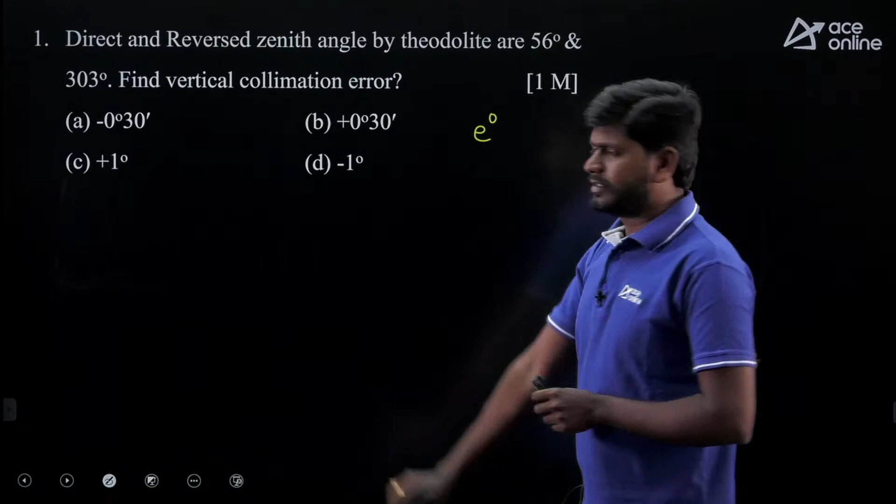So here the question is like this: direct and reversed zenith angle by theodolite are 56 degrees and 303 degrees. He is asking us to find out the vertical collimation error, right? So here we need to focus on the words direct and reversed zenith angles. What do you mean by this direct and reversed zenith angle? Direct means face left position, reversed is face right position, right? So here, in order to calculate the collimation error, I am considering the collimation error as E degrees, and the observed direct angle is 56 degrees.

So from this observed direct angle, I am calculating the corrected angle. So corrected angle will be 56 degree minus E degree. I am considering this as equation number 1. In similar fashion, I am considering the reversed zenith angle, that is 303 degrees. For 303 observed angle, I am taking the corrected angle as 303 degrees minus E degrees. This will become equation number 2. Here the observed zenith angle and reversed zenith angle should be equal to 360 degrees.

So the observed zenith angle plus reversed zenith angle should be equal to 360 degrees. So let's simply equate. Equation number 1 is 56 degree minus E degree plus 303 degree minus E degree should be equal to 360 degree. If you solve it for E, you will get 359 degree minus 2E is equal to 360 degree. So the final answer, E is equal to minus 30 minutes. So minus 30 minutes, option A is the correct answer for question number 1.

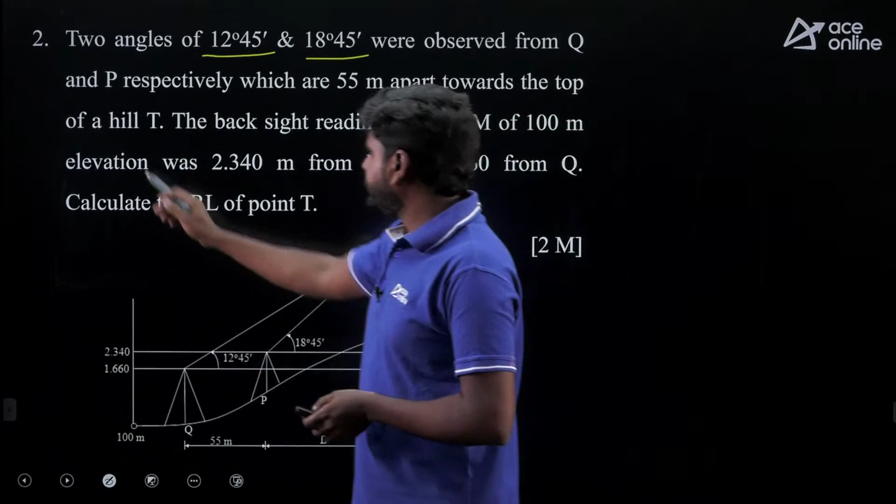So let us discuss about second question. The question is given like this: two angles of 12 degree 45 minutes and 18 degree 45 minutes were observed from Q and P respectively, which are 55 meters apart towards the top of a hill T. The back sight reading on the benchmark of 100 meter elevation was 2.340 meters from P and 1.660 meter from Q. So from the given data, if we plot a diagram, it will be like this.

So this is vertical height V1 and V2, and the horizontal distance Q and P are 55 meters apart, and the respective angles are mentioned here, and the respective staff readings are given here. Let us take it as S1 and S2: staff reading 2.340 as S1, 1.660 as S2. So here from the figure we can write V2 minus V1, which is equal to 2.340 minus 1.660. This is the only logic here. So simply substitute V2 and V1.

So how can we get V2? This is the V2. Consider this triangle. From this triangle we can write V2 like this: 55 plus d tan, what is its corresponding angle? 12 degree 45 minutes. Minus, what is V1? Now consider this triangle: d tan 18 degree 45 minutes. So this entire thing is V2 and this is V1. It should be equal to 2.340 minus 1.660.

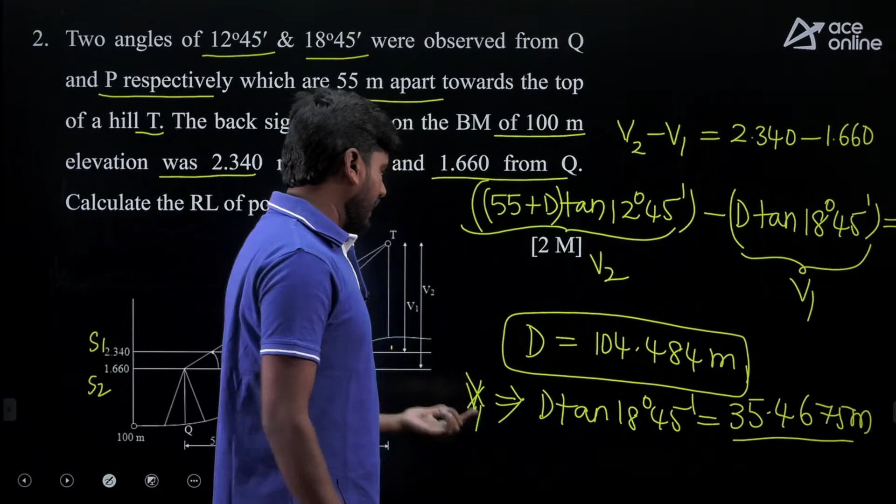So now we have V1, but he is asking us to find out what is the RL of top of hill, point T. So how to calculate that? See, RL of benchmark is 100 and we have V1 value, so its corresponding staff reading should be 2.340. So RL of benchmark plus S1 plus V1 will be the RL of top.

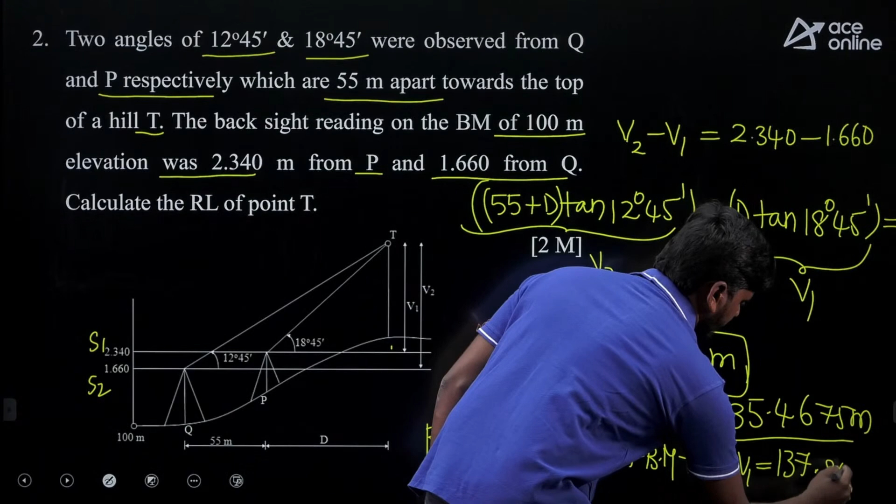So last step: RL of T is equal to RL of benchmark plus S1 plus V1. So the final answer is 137.8075 meters. Okay, so this is the solution for this problem.

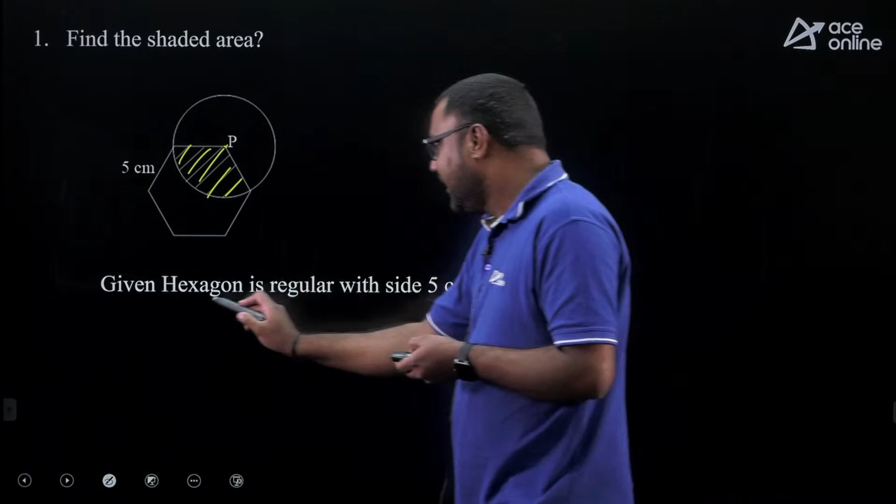So before solving this question, I want to just refresh the inputs related to regular hexagon, interior angle you have to know. In regular hexagon, when all sides are equal, interior angle, hexagon if you just go through, we have 6 equilateral triangles here. If you just work on it, we got 6 equilateral triangles.

Equilateral triangle, we know interior angle is 60 degrees. So here 60, here 60, total 120 degrees. So this angle is 120 degrees. Here also it's 120, here also 120, here also 120. So all interior angles are 120, 120, 120. There are 6 equilateral triangles in this hexagon, each equilateral triangle interior angle 60, here 60, here 60, giving 120 degrees. That is the input we are using for this question.

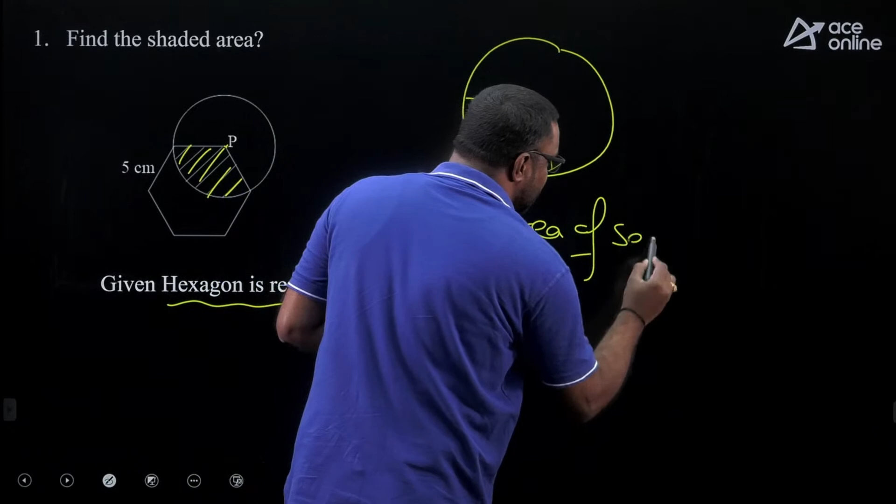120 degrees is the interior angle. See here, this angle is 120 degrees. We have a circle, part of that is covered, so this angle is 120 degrees. Area of circle is pi r square, but they want only this shaded part, that's area of sector. Area of sector is pi r square into theta divided by 360 degrees. If theta is 360, this will cancel and give area of circle pi r square, that you already know. Here interior angle is 120 degrees, that's the content we learn from this hexagon. 6 equilateral triangles, 60, 60, 120 we got.

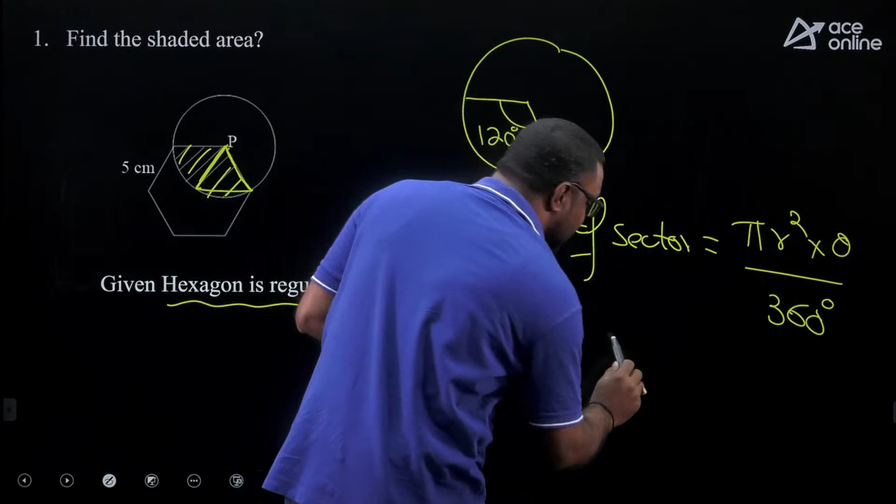Here radius is nothing but equal to this part, which is equal to side, since this is 6 equilateral triangles as mentioned. You can see this part also can be considered radius. Radius is equal to side of the hexagon, so radius here is side of the hexagon which is 5. So pi into 5 square, theta is 120 degrees here, so we get 25 pi divided by 3. If it's fill in the blank, we need to simplify it, or if it's option based, depends on options, we mark accordingly. Mark 25 pi by 3, or take pi value as 22/7 and substitute in the options.

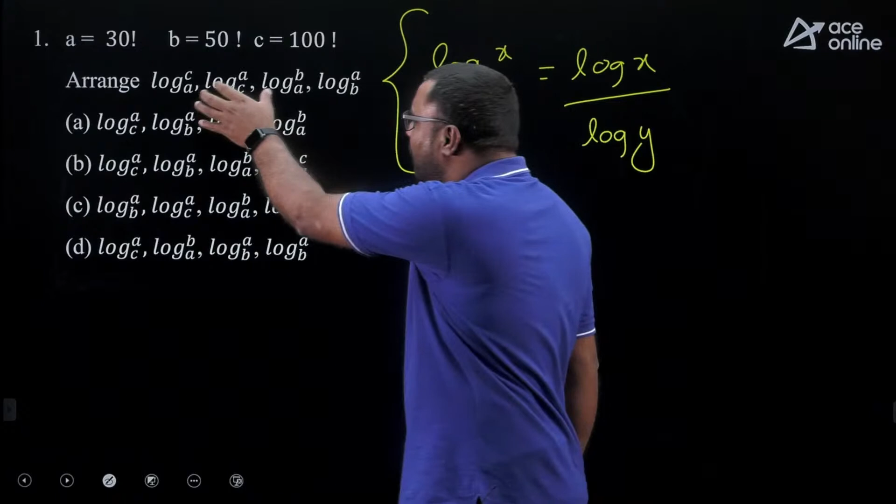Now the second question, logarithm, very easy question related to logarithms. They give value A as 30 factorial, B as 50 factorial, C as 100 factorial. Instead of factorial you can take just 30, 50, 100 and still solve this question. One basic thing required, which we discussed in regular sessions, is log x base y is nothing but log x divided by log y. That's it, very simple. If you know this point, this question is done. You have to calculate 4 things and arrange them in ascending order.

This is not mentioned here, but we have to arrange in ascending order, from low value to high value. Take A as 30, B as 50, C as 100. Here log C base A is nothing but log C divided by log A. Taking C value as 100, or 100 factorial, and log A as 30 factorial, that is log C base A. Definitely numerator is higher, denominator is least, so this will be the highest one. Log C base A is the highest among all, so highest position is log C base A. This is ascending order as asked by students, log C base A is required, so it's not log B base A.

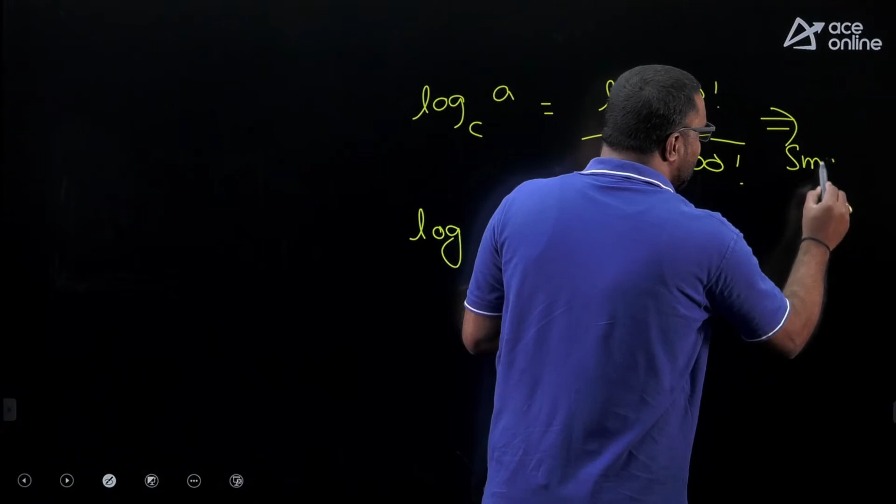What is the least value? Smallest divided by highest. Smallest value A is 30, largest is C 100, so log A base C will be the smallest. I'm just deciding the smallest and biggest value among the given terms, so log C base A is the largest one. Log A base C means log 30 factorial upon log 100 factorial. Lot of students worry about the exact value, but actually the value isn't required, only whether it's smallest or largest. So smallest is log A base C, that's in option B, and largest is log C base A... no need to work out all the things, just use option elimination. It's option B that is correct.

Now the next question, my dear friends. Here also they ask regarding geometry concept, area, shaded area. This is the shaded portion here, if it's not visible, this is the shaded part area you need to calculate. Fine, so here one simple trick: this is a square, each side is 4, 4.

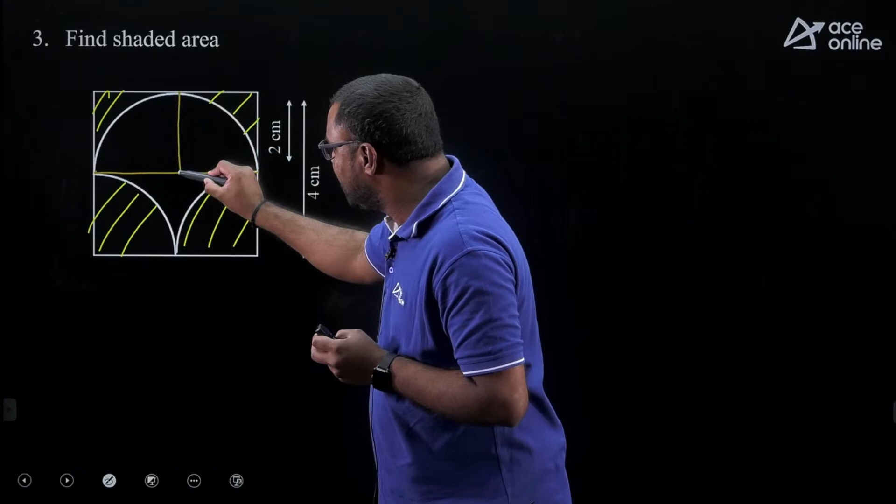Now see the simple point, okay, no need of using any formulas, it's a basic thing. So if you see, divide this into two parts. This is a semicircle, I divide this into two parts, semicircle, this is 1/4 of the circle, this is 1/4 of the circle, you want only shaded area, right?

Now this shaded area, I can put it here, you can flip it, I can use it here. This one if I flip, I can use it here. It's nothing but half of this portion, this entire square, half of that is what they are asking. No need to do area of semicircle, area of rectangle, subtract that, all not required. This part you just dump it here, this part you just move here, this entire will be the shaded area, right? So this length is nothing but 4, height is 2.

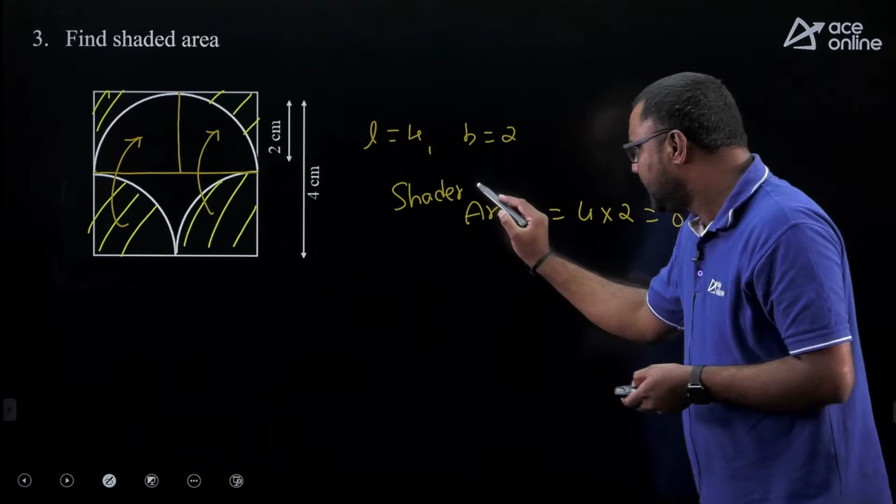It's a rectangle with length 4 and height or breadth we can consider as 2. So shaded area is nothing but our required area, our shaded area is nothing but 4 into 2, which is 8 centimeters square. As I mentioned, units is centimeters, right? So no need of that semicircle and all, just simple point to do this question. Shaded part, shaded area.